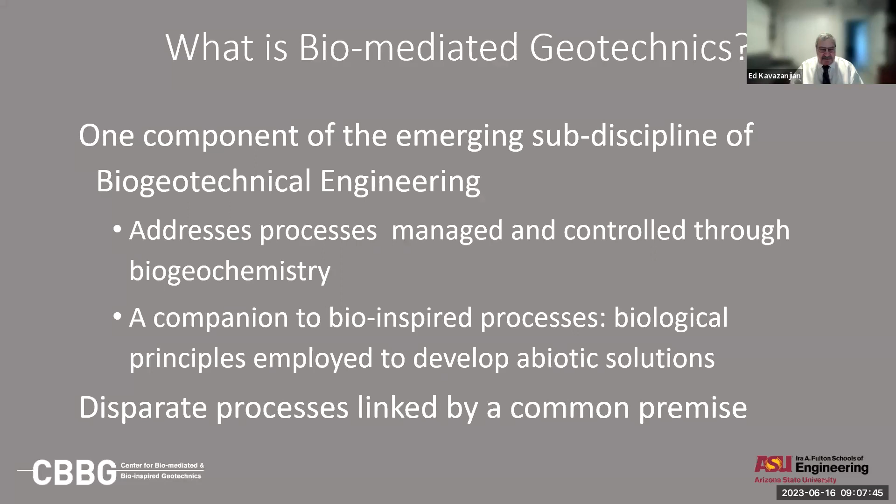Biomediated geotechnics addresses processes managed and controlled through biogeochemistry. It's a companion to bio-inspired processes, the second half of biogeotechnical engineering, in which biological principles and materials are employed to develop abiotic solutions. These are somewhat different or disparate processes, but they're linked by a common premise.

That premise, that biogeotechnical premise, is that through 3.8 billion years of trial and error, call it evolution if you want, or trial and error, or intelligent design, nature has developed many elegant and effective biogeotechnical processes. So we can learn from nature how to use these processes to address a variety of geotechnical problems.

For instance, this is a building in San Francisco called the Cliff House. I think it's obvious why it's called the Cliff House. Those cliffs are carbonate cemented sands, bio-cemented sands that naturally formed. From an engineering perspective, are very resistant to erosion. From a geological perspective, maybe not so. But from an engineering perspective, they're durable materials that are very resistant to wind and water erosion.

And this is a picture of an ant tunnel. Some of you may have had an ant farm like this when you were children. The ants tunnel 2 orders of magnitude more efficiently than people in terms of the amount of energy they use to move the earth. Now, we'll probably never get to that level of efficiency, but what can we learn from ants and how they tunnel to make our tunneling processes more efficient and safer?

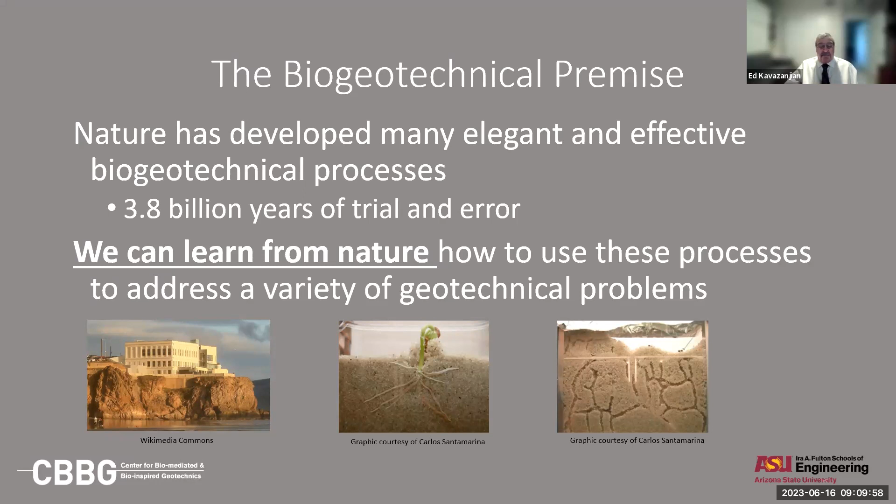Back to biomediated processes, which is the topic of my lecture today. So mediate, that's a verb in the English language, to bring about a result such as a physiological effect. A biomediated geotechnical process is a biogeochemical reaction that changes the geotechnical behavior of the soil or rock beneficially in a way in which it can aid us in our engineering. And it may involve a living organism like a microbe or a fungi, or a biological material like an enzyme.

Sometimes we broadly interpret this process to include abiotic natural processes, interpreting the word bio as in the biosphere. So any process that's in the biosphere, even if it doesn't involve biological materials or a living organism, we might interpret as a biomediated process. And we can argue about that forever. I think it's up to the individual as to how they want to interpret that.

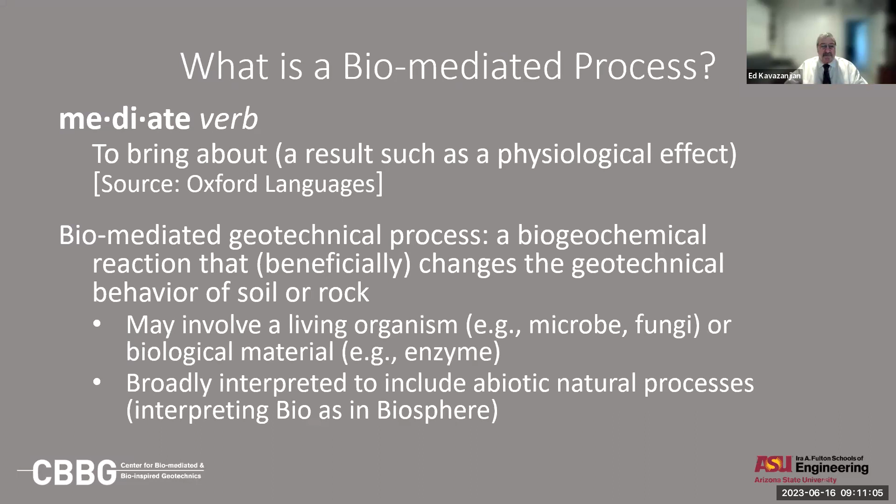This is a little diagram prepared by my colleague Jason DeJong that illustrates why we are interested in biomediated processes from a geotechnical perspective for improving the properties of soil. So we have a chemical reaction that may induce inorganic precipitation, which we call biomineralization. It could induce organic precipitation, biofilms, gas generation, biogas, and all of these processes can have beneficial engineering effects. And all of these processes can be controlled.

They can be mediated by biological reactions, by providing nutrients, by stimulating microbes. We can mobilize these chemical reactions to influence the mechanical properties of the soil, to influence the permeability by 3 orders of magnitude, to influence the stiffness by 2 orders of magnitude, compressibility by 2 orders of magnitude, shear strength by 2 orders of magnitude. We can control the volumetric response to some extent. We can do these pretty well in the laboratory right now for a variety of processes.

The challenge in front of us now is upscaling these processes from the lab into the field. And in the field, when we apply these processes, we have to deal with issues like spatial uniformity of the ground and the permanence of our processes. We're really just starting to address those issues from a biogeotechnical perspective.

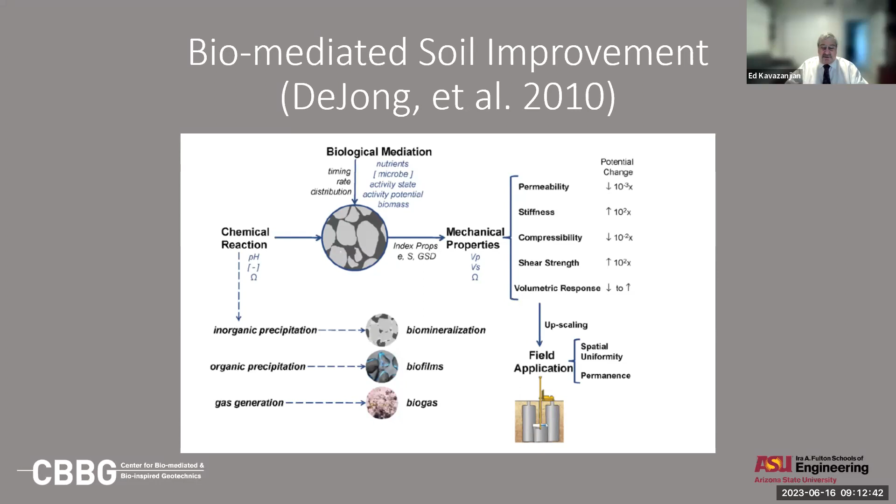Beneficial biomediated geotechnical processes include mineral precipitation. By precipitating minerals, we can cement soils together and increase their strength and stiffness. We can sequester contaminants in the soil. We can densify the soil and make it more dilatant. We can reduce the permeability of the soil.

Biogas generation - we can take advantage of that to reduce the permeability of the soil, or the hydraulic conductivity, because the unsaturated hydraulic conductivity is much lower than the saturated hydraulic conductivity.

We can change the undrained behavior. And I put undrained in quotes because typically when we think of undrained behavior, we think of a saturated material which doesn't change in volume. But when we desaturate the soil with biogas generation, even though the soil is undrained, it may still involve volume change. We can take advantage of that in some situations, for instance, in mitigating earthquake-induced soil liquefaction.

We can also use organic precipitation to generate biofilms, and use that to reduce the permeability. An interesting application that we've talked about in my center, but haven't fully addressed, is corrosion protection. Dentists are using biofilms to prevent cavities in teeth - can we use biofilms to prevent corrosion of steel elements buried in the soil, like piles and pipelines?

And then we have chemical transformation of chemical species. This is a process that's widely used now for soil and groundwater remediation. I'll talk a little bit about that at the end of the lecture.

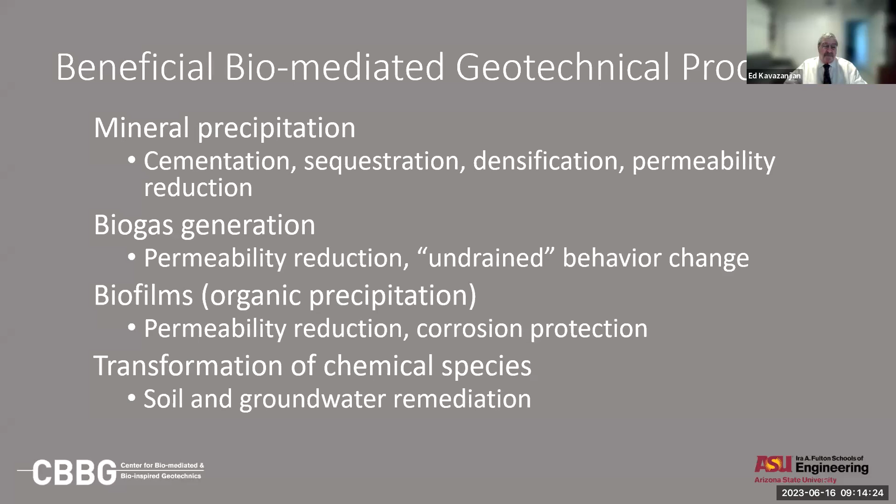So what I'll talk about today will be mineral precipitation. It's the most investigated biomediated process, and carbonate precipitation is the most studied mineral precipitation process from a geotechnical perspective. We have MICP, microbially induced carbonate precipitation, which is the most common process people are looking at.

EICP, enzyme-induced carbonate precipitation, is also popular - it's coming on fast. Then there's a third process we call MIDP, microbially induced desaturation and precipitation, which is also under investigation primarily for desaturation, but also has some benefits in terms of precipitation. There are many other mineral precipitation processes involving iron, phosphorus, salt, and other minerals, but carbonate precipitation is still the one that has generated the most interest among geotechnical engineers.

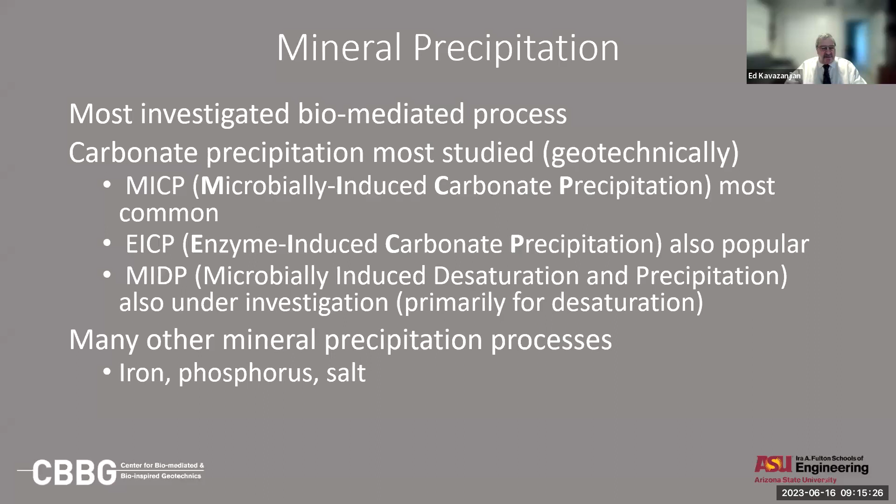So, calcium carbonate precipitation - I call it biogeoalchemy. I call it turning sand into sandstone via precipitation of calcite, or calcium carbonate, as bioalchemy. The medieval alchemists wanted to turn lead into gold. We're not turning lead into gold, we're turning sand into sandstone. But if we can do that efficiently and cost effectively, we can make just as much money as turning lead into gold. Hence the term biogeoalchemy.

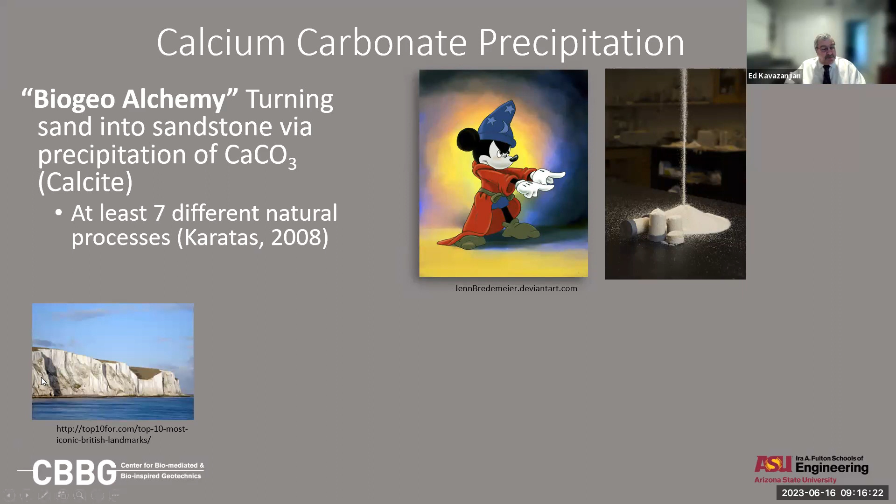One of the first students I had working on this process, Ismail Karatas, identified seven different natural processes by which calcium carbonate is precipitated in nature. One of them, for instance, is the White Cliffs of Dover. This isn't carbonate sand - this is pure carbonate that was precipitated by a biological process.

Again, these cliffs are very erosion resistant from an engineering perspective, with a 75 to 100-year lifespan perhaps. Maybe not in geologic time - they will erode - but from an engineering perspective, this carbonate precipitation has created a very durable material. If we could learn how to do that where we needed this kind of material, that would be a great contribution to geotechnical engineering.

But I first got interested in biogeotechnical engineering when I was exposed to this, and I thought, well, in a landfill that's not a good thing. But what if we could get this to happen in a situation in which it's beneficial - for instance, under a building, or in an area where we wanted to tunnel through cohesionless sand and gravel?

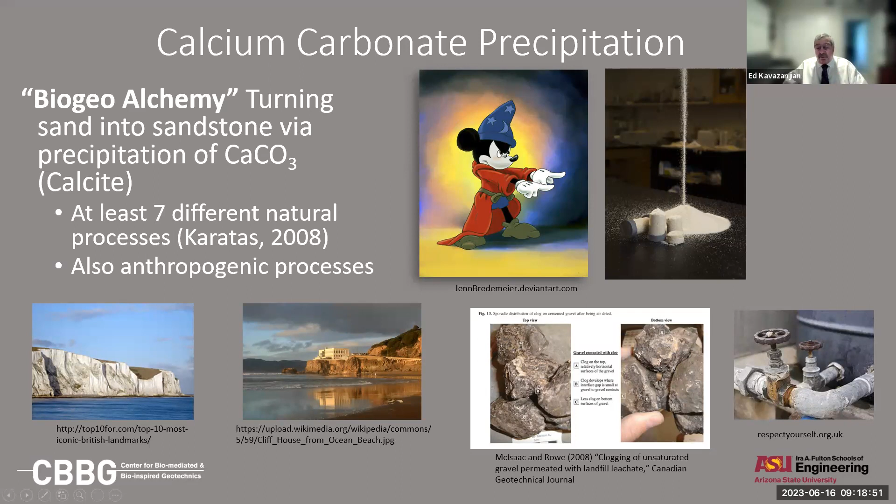Here's another anthropogenic or human-induced mechanism. We often see white scale on pipes around the joints where they leak a little bit, and we see these scales on the inside of pipes. These are typically calcium carbonate scales that develop in a relatively short period of time, a time frame that would be suitable for engineering purposes.

So if we can control calcium carbonate precipitation in sands and cohesionless soils, there are just so many applications. We can support foundations without piles, with smaller footings.

We can control fugitive dust. We first looked at fugitive dust as kind of a side application at construction sites. Frankly, of all the applications that we've been looking at in our center, this is the one that has the most interest from outside parties, and I'll talk quite a bit about it later.

Mitigating earthquake-induced liquefaction is something that's very dear to my heart, having lived in California for 20 years. We could stabilize underground openings in what our tunneling colleagues call running or flowing sands. We could stabilize subgrades for roadways, stabilize slopes. We could provide surface water erosion control, scour protection around bridge piers. We could create building materials, biobricks, by biocementing sand and gravel. And there are many more applications. I think you just have to use your imagination.

So let's talk about the three predominant processes that people have looked at for carbonate precipitation, starting with MICP, microbially induced carbonate precipitation. It's based on the hydrolysis of urea, or ureolysis. In MICP, the enzyme urease breaks urea down into carbonate ions and ammonium ions, creating carbonate ions in an aqueous solution. If calcium ion is present, it can combine with the carbonate to form calcium carbonate, which under the right environmental conditions will precipitate.

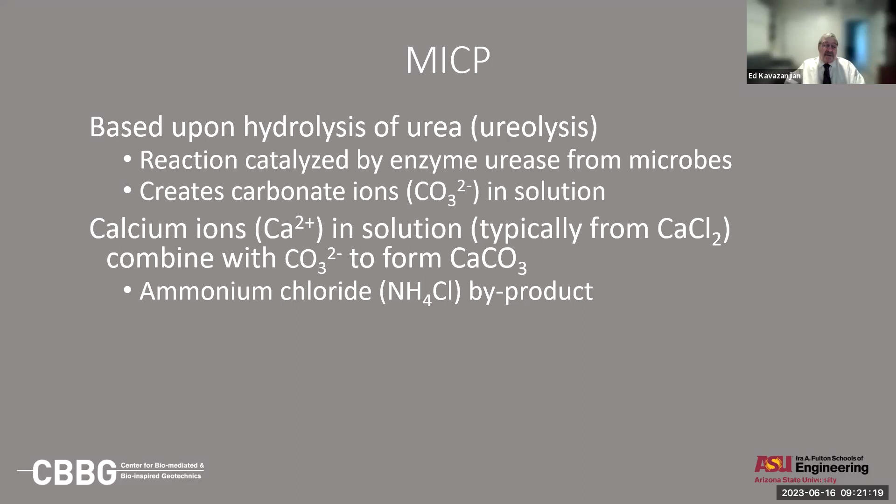We can't forget about the other half of the ureolysis reaction, because not only does it create carbonate ions, but it creates ammonium ions, NH4. And if we're using calcium chloride as the source of our calcium, then we have chloride left over. The chloride will combine with the ammonium and produce a byproduct, ammonium chloride, a salt that's sometimes regulated as a groundwater contaminant. So it's something we have to pay attention to when we're using MICP. I'll talk a little bit more about that in a bit.

But MICP is by far the most popular biomediated process for geotechnical engineers. A quick Google Scholar search identified 716 new citations in January, February, and March of this year. Sometimes I think I get asked to review all of those for journals, given the number of requests that I get. And since 2022, there have been 2,970 citations in Google Scholar on MICP for geotechnical purposes. It's a pretty impressive number.

So MICP via ureolysis, we rely on the microbes, the M in MICP, to provide the enzyme urease. Ureolytic microbes can be introduced into the process in two different ways. We can use what we call bioaugmentation, where we grow the microbes outside of the ground and then inject them into the ground along with the urea and the calcium chloride, or we can stimulate the ureolytic microbes already in the ground. There's a theory in microbiology behind this.

I became a geotechnical engineer because I didn't want to take chemistry and biology, and I've been forced to learn more microbiology in the last 10 years than I ever thought I would know. But there's a philosophy in microbiology that every place you go, you have all the microbes you need for whatever microbial process you want to control. All you have to do is stimulate those microbes.

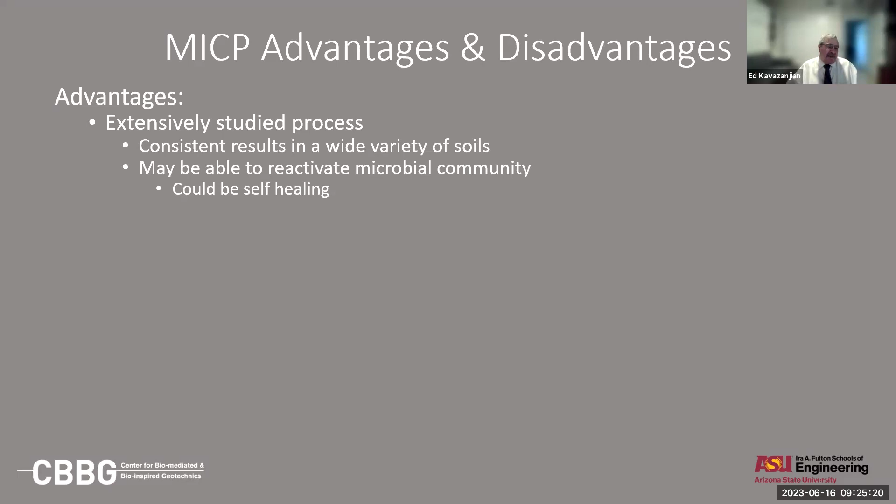What are the advantages and disadvantages of MICP? Well, one of the advantages is it's an extensively studied process. We can get consistent results in a wide variety of soils. And one of the things about MICP is once the microbes are there, we can probably reactivate them. They may go dormant, but if you need to reactivate the process, for instance if an earthquake comes and breaks some of the bonds that you're relying on to mitigate liquefaction, hopefully by giving them a little bit more nutrients we can reactivate that microbial community and create something of a self-healing process. That's yet to be proven, but that's kind of a goal.

What are the disadvantages? Well, one of the disadvantages of MICP is multiple cycles of treatment are required for significant strength gain. Sometimes some of the papers I see that get megapascals in unconfined compressive strength are treating the soil 10, 12, 14, 20 times. Frankly, I don't know any ground improvement contractor who's going to want to use a process where he has to apply the treatment 20 times.

Other disadvantages of MICP: the embodied energy may be similar to Portland cement. It's been promoted in some places as a sustainable replacement for Portland cement, but urea comes from natural gas, and the embodied energy in the urea that we use in MICP is at the same level as the embodied energy in the Portland cement that we use for regular cementation. I'll talk about this again at the end when I talk about life cycle analysis.

I mentioned the ammonium chloride byproduct that can be problematic, particularly for the multiple cycles of treatment, because you're going to be producing more ammonium with each treatment. Some applications require fewer treatments and mitigate this issue.

Dust control, we don't need 8, 10, 12% carbonate, we just need maybe 1%. Liquefaction mitigation, it seems like we don't need as much carbonate as we do to get a high unconfined compression strength.

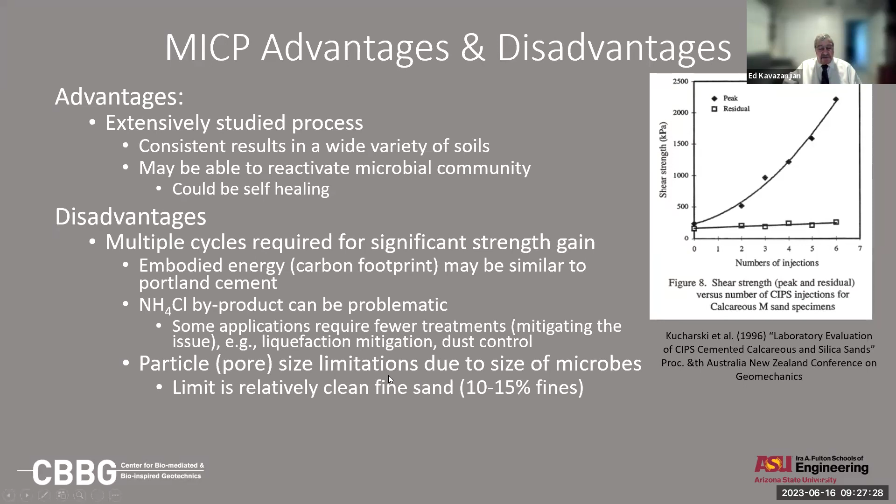There are also particle pore size limitations due to the size of the microbes. The microbes are actually kind of chunky, they have trouble fitting through the pore throats. So if you're generating the microbes outside of the soil and expecting them to penetrate into the soil, you can be limited to relatively clean, fine sands or coarser materials, but not finer materials. And if you have too many fines in the sand, over 10 to 15%, you might find some limitations based on pore size.

What is the experience with MICP? Well, there's more and more all the time. Two of the seminal experiences.

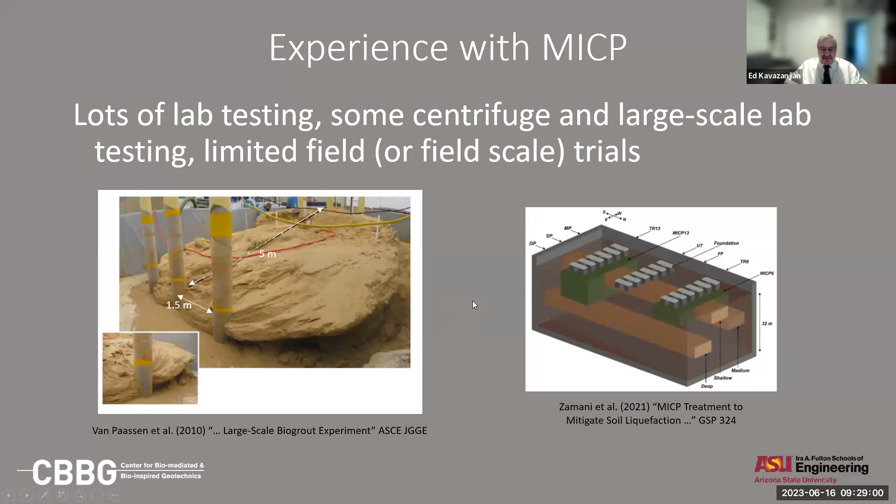More recently, UC Davis, the group led by Professor DeJong, has been doing centrifuge experiments. Here's a centrifuge experiment by some of Dr. DeJong's students and postdocs, where they've used MICP treatment to mitigate soil liquefaction. They've biocemented these blocks of soil, put little model foundations on top of them, spun it up to 50 or 60 Gs, and then shaken it with simulated earthquake shaking, and shown that the treatment is successful at mitigating the effects of liquefaction.

The second process is EICP, and it's really the same chemical process as MICP. It uses ureolysis, hydrolysis of urea catalyzed by the enzyme urease. The difference is that EICP uses free urease. It doesn't rely on microbial urease, although some people who do EICP cultivate ureolytic microbes in the lab and then extract the urease from them.

In our lab, we extract it from plants, from a bean called the jack bean, a relative of the soybean that's particularly rich in urease. So we have the free urease. We found, somewhat accidentally, that adding powdered milk with the urease, originally proposed as a stabilizer for the enzyme, has had the unanticipated effect of providing very high strength at low carbonate content.

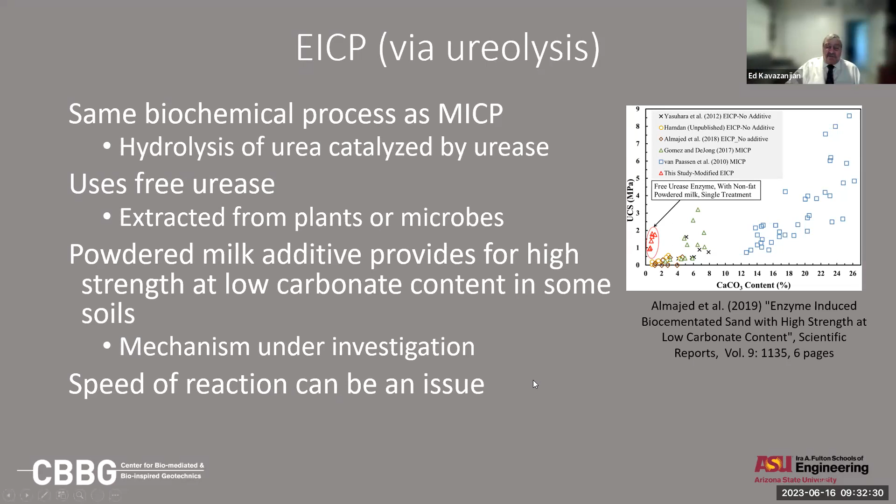So what are the advantages and disadvantages of EICP? Well, the advantages: we use less substrate because we get higher strengths at lower carbonate contents, or the same strength at lower carbonate contents. That means lower cost, and maybe one and done. Maybe we can learn how to get that high strength in one cycle, and we don't have to treat the soil 10 times. When we use less substrate, we produce less ammonium chloride, so that's a little bit easier to manage.

All of the carbon in the system goes to carbonate formation. In MICP, some of the carbon has to go to feeding the microbes. In EICP, all the carbon goes to forming carbonate. And then the enzyme is smaller than the microbes, so it can penetrate finer grained soils. It can penetrate into coarse silts.

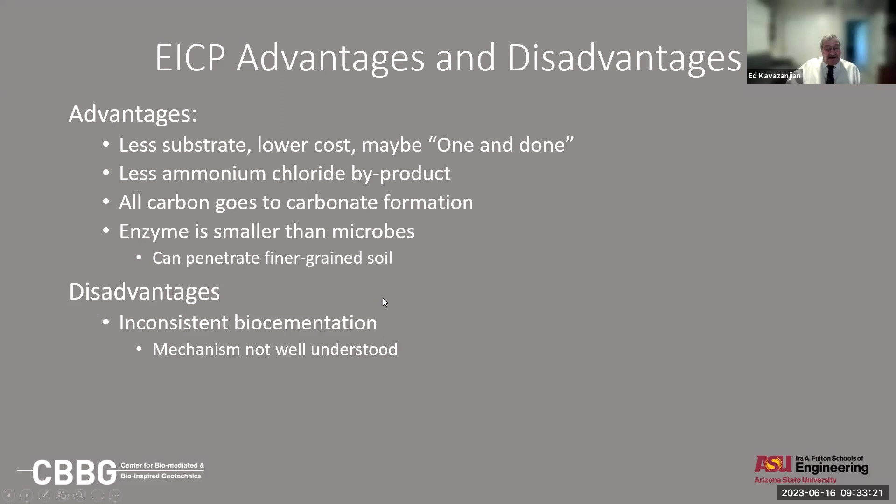Disadvantage: we find this inconsistent biocementation. I'll show you an example of that in a minute. The mechanism is not well understood, so we need to understand that mechanism better.

So here's some Ottawa sand. This is Ottawa 2030 sand. It's the sand that passes the number 20 sieve and is retained on the number 30 sieve. In the US, it's a standard testing sand, found everywhere in the middle of the United States. It's a glacial outwash sand, 99.8% silicon dioxide, quartz. And you can buy it from a bunch of different quarries.

So we were buying it from one vendor, and this was the soil we treated with one cycle of treatment, and we got 1.8 megapascal in strength. We were running out of this sand, and we bought it from another quarry.

It was a little cheaper, so we called this the second quarry we bought it from. Pretty much the same stuff, 99.8% silica quartz, 2030 sand. But when we treated it, we got half the strength - 0.7 megapascal. We found that pretty curious.

So we bought Ottawa 2030 sand from a third quarry, which we call the B3 sand. When we treated it, we got 0.2 megapascal. I didn't trust these results, so we ran tests on all three sands 3 or 4 times to confirm. I still don't understand why we get 10 times higher strength with this Ottawa 2030 sand than with this Ottawa 2030 sand.

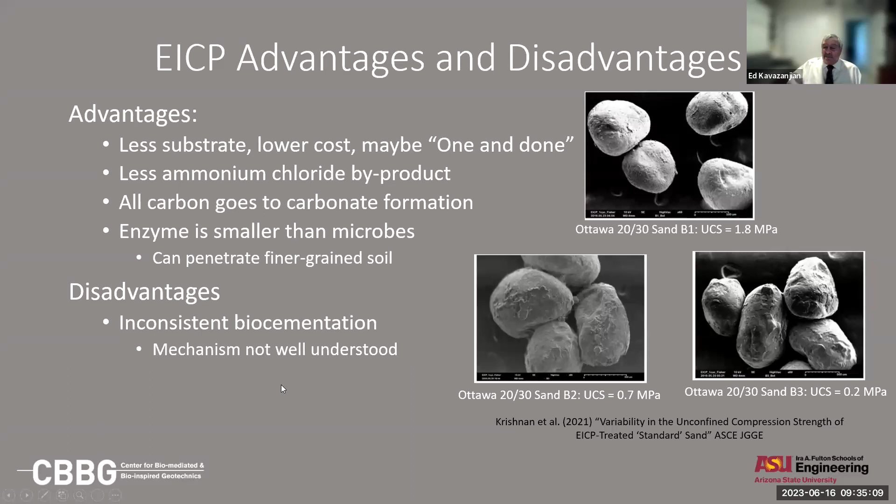So if we can understand what makes this sand so strong, we could learn how to treat other sands so they perform the same way. Then we'd really have a process we could use for foundation improvement, making building materials, and a variety of important applications.

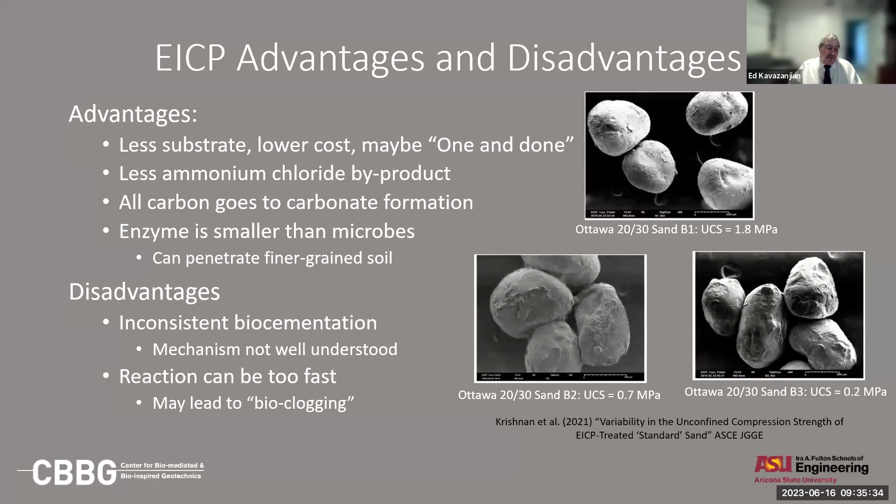The reaction can be too fast, not only clogging the nozzles and tanks, but clogging the soil around the injection points. If it precipitates too fast around the injection point, the permeability will drop, it'll get harder and harder, and eventually become impossible to introduce more substrate into the soil.

What's our experience with EICP? Not as much lab data as MICP, but it's starting to accumulate. Several investigators are studying ways to control the reaction. You can reduce the pH of the solution, reduce the temperature, or chill the EICP solution.

There are some studies using fine-grained soils, silts and clays. Some purport to show improvement, but I find the results inconclusive or unconvincing. One problem is the EICP solution has salt in it, calcium chloride. When you introduce calcium chloride into a saturated clay, you're going to suppress the double layer and change the strength anyway. So for studies claiming to improve clay properties through EICP treatment, it's not clear to me whether they're really improving the soil by precipitating carbonate or by suppressing the double layer with the salts introduced. I need to be convinced of that.

But moving on, we've done quite a bit of wind tunnel testing on fugitive dust control, and now we're in field trials. We have large-scale field trials - one completed and 3 pending within the next 6 months. We're fortunate at Arizona State to have a wind tunnel that was developed for NASA to study windstorms on Mars, and we were able to use that.

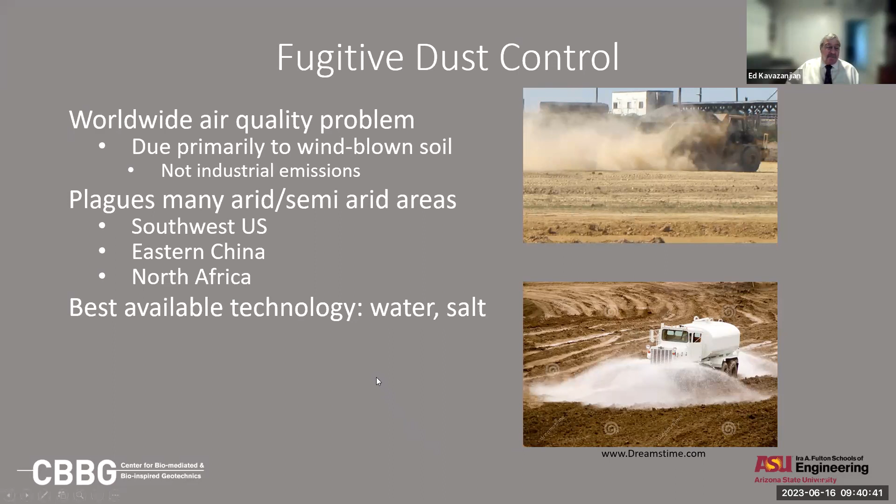Again, looking at Google Scholar - not quite as robust as for MICP, but for EICP there were 70 citations in 2021, and 14 in the first three months of 2022. For MICP for dust control, there were 106 citations in 2021 and into 2022.

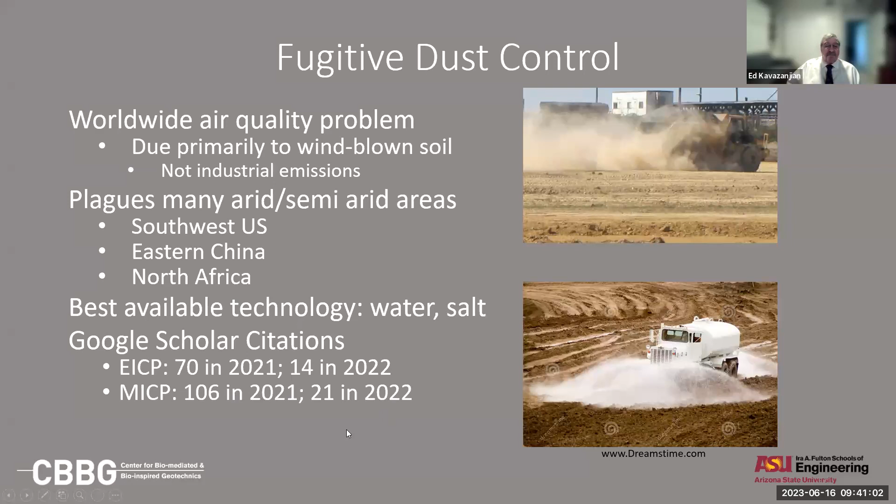So, biogeotechnical fugitive dust control using either EICP or MICP - in our test plots we've done both. The concept is to create a wind erosion resistant carbonate crust by spraying on an EICP solution.

The advantage compared to applying water is it's one and done - you don't have to continuously return to the site to keep the soil wet. The question is, one and done for how long? Will it last a week? A month? A year? That really affects the economics of the process.

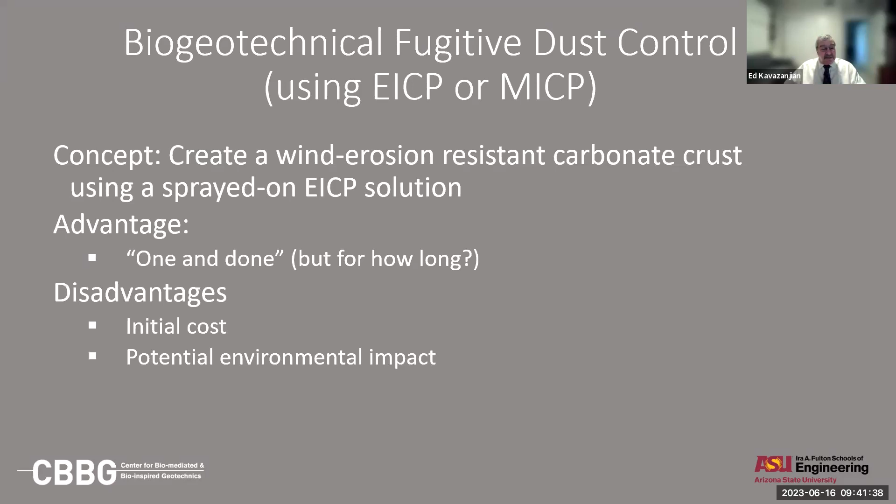The disadvantages of this process are a higher initial cost than water - you've got to buy the chemicals. If you're doing MICP, you use bio-augmentation, so you have to grow the microbial culture; for EICP, you have to get the enzyme. In both cases you need urea and calcium chloride. There's also potential environmental impact from the ammonium, and from the life cycle assessment of the urea.

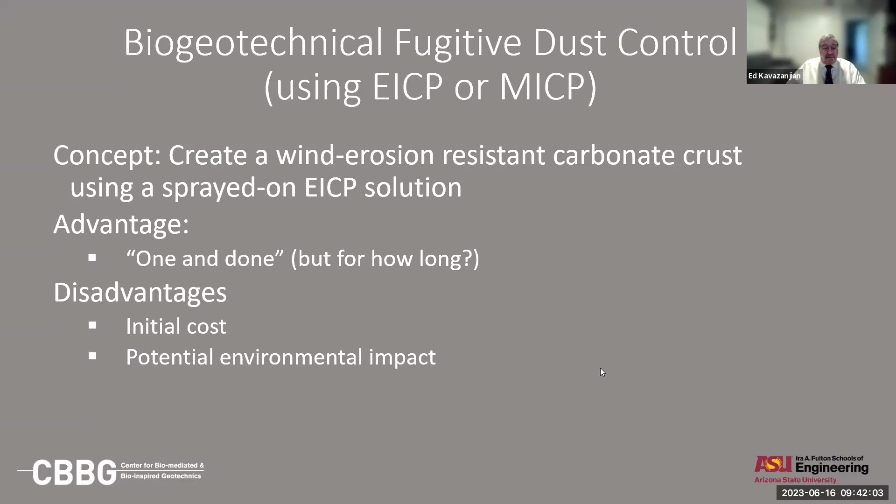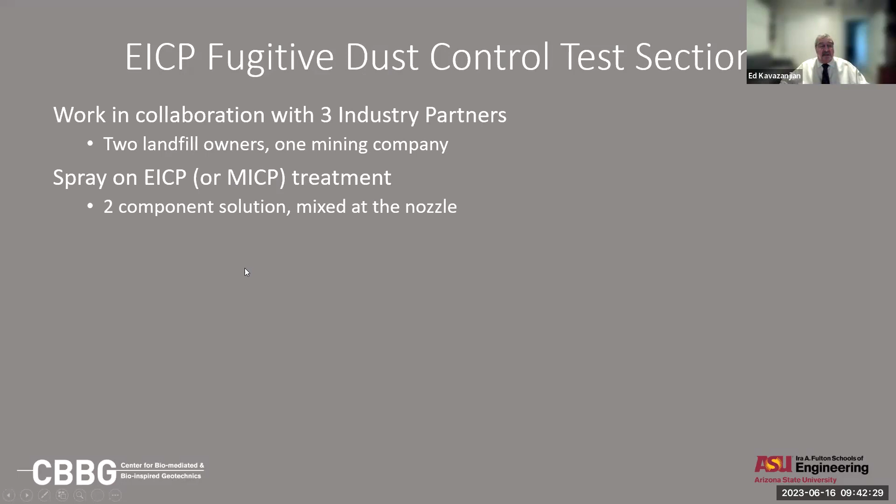As I mentioned, we've moved from wind tunnel testing into the field. The one test section we've completed was work done in collaboration with 3 industry partners - 2 landfill owners and a mining company. We sprayed on both EICP and MICP as a 2-component solution, using 2 tanks with our solutions mixed at the nozzle.

We did an initial trial at an Arizona landfill in 2021, where we developed our deployment and monitoring techniques. Here are my students spraying the EICP.

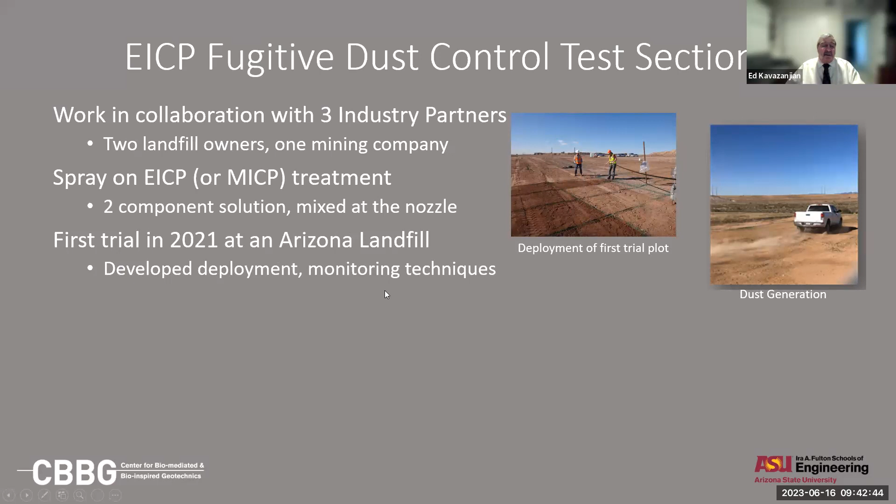Then we did a second trial where we deployed 5 test strips: 1 for MICP, 1 for magnesium chloride salt - the mining industry standard, 1 for EICP, 1 untreated, and 1 where we mixed the EICP with a little bit of xanthan gum, supplementing the enzyme with some biopolymer. We are in the process of comparing the results.

One thing we learned from the first trial is we couldn't wait long enough for a windstorm to generate dust. In fact, before we had a significant windstorm, we had heavy rains, which washed away a lot of our crust. So in our second trial, rather than waiting for wind, we created our own dust storm - we dragged a chain link fence behind a pickup truck and drove back and forth on our test strips to generate fugitive dust and get measurements to compare these treatment techniques. That field trial is now completed.

The PhD student writing that up will be defending her thesis next month, and we'll see how EICP compares to MICP and magnesium chloride. We have 3 more field tests in planning, looking at a fallow agricultural field in Arizona, which is assumed to be a major source of fugitive dust.

We have another mine tailing site we're going to treat for the Arizona Department of Environmental Quality. And then there's the Salton Sea.

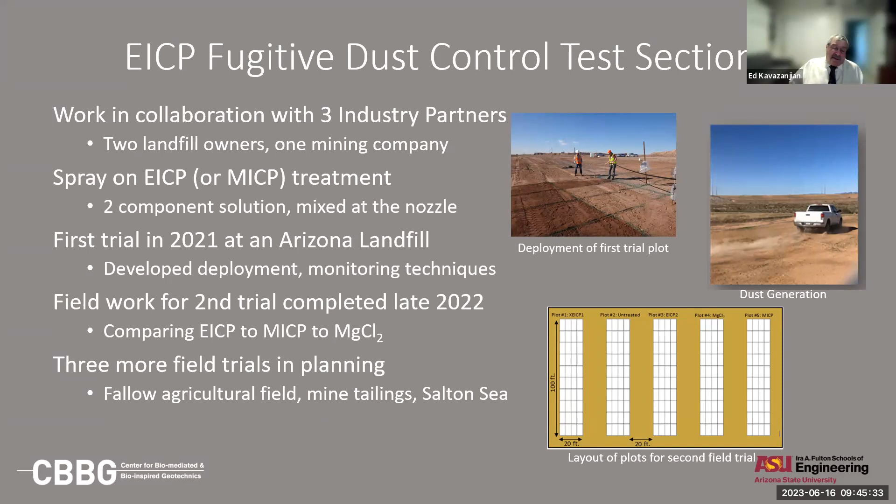And there are several other sites that have contacted us. The Highway Department in the Northeast US says that after the spring thaw, they have fugitive dust problems. An iron ore mine in Minnesota said the same thing. When the ground thaws and dries out, they have fugitive dust. And so we're looking at the field freeze-thaw resistance of our carbonate spray to see if it has applications in those kinds of climates.

One other application to talk about on EICP, and that is making biocemented soil nails and columns. So the concept is to create columns, either vertical or angled, of biocemented sand for ground improvement.

And we take inspiration from other improvement processes. I like to show this picture over here on the left. This is from Lizzi, as quoted by Mitchell and Villet. And Lizzi, this was really soil nailing, but I show this because he called these root piles. He was one of the first with a bio-inspired design. He developed this idea of reinforcing the soil, the slope, the same way that roots reinforce the ground. So he was really the first bio-inspired engineer.

But if we look at what we use columns for in geotechnical practice, we look at using them for soil nails. We can support foundations. We can create soil mixed columns for liquefaction mitigation and ground improvement, support embankments and retaining walls. Lots of applications for biocement or for improved soil improvement via columnar reinforcement.

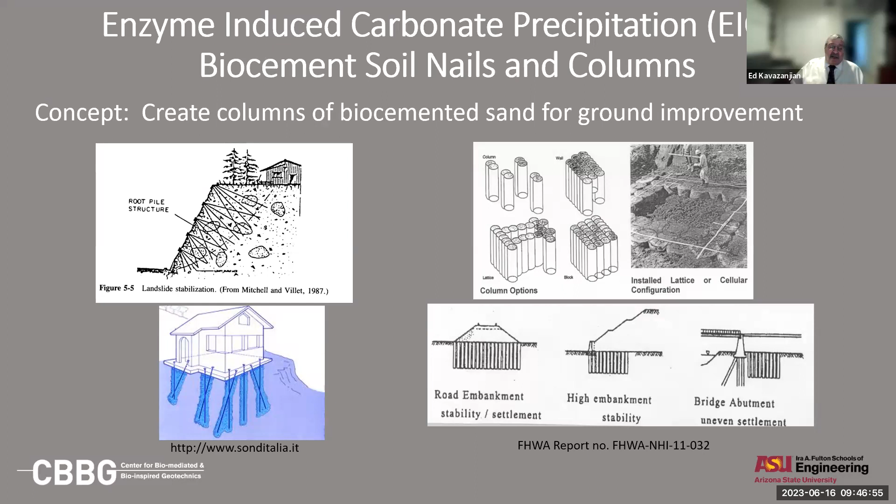We said, well, maybe we can also do that with soil nails. So we introduced 4 tubes, perforated tubes at 15 degrees through the face. We drilled holes in the faceboard, inserted these tubes, and then we injected 155 milliliters of EICP solution into each tube and let it cure.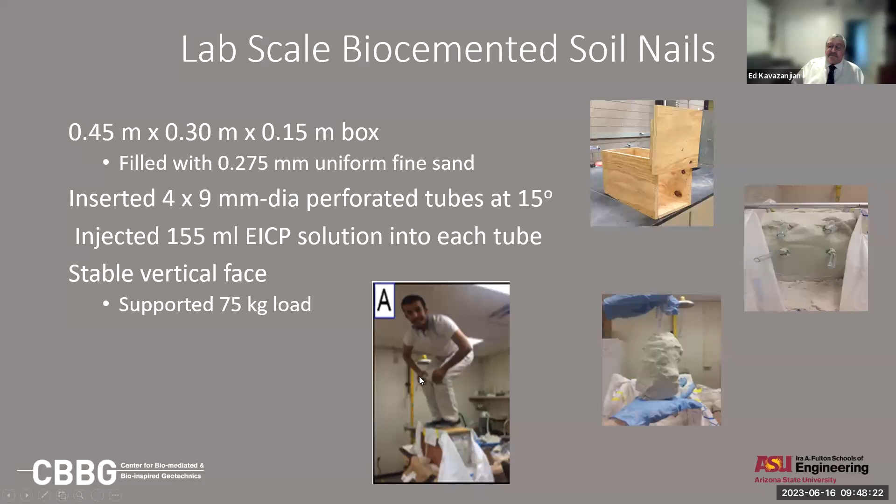After we excavated around our soil nails, this is what our biocemented column looked like. Moving on, we decided to create some field scale columns. We created some mid-scale columns in wooden boxes 1 meter high, and there's a paper in Soils and Foundations that discusses these mid-scale boxes.

But we used that as a prelude to creating these field scale columns in our test pit. So CBBG, the Center for Bio-mediated and Bio-inspired Geotechnics, has a test pit on one of the ASU campuses. We're about 6 meters by 2.4 meters in the main bay, and then we have an adjacent bay here that's 3 meters by 1.8 meters. It's 3.8 meters deep. We can fill it up with quarry sand. We have a crane, and we can put reaction beams across the pit at 3 locations.

And so we took advantage of this to create some EICP columns, enzyme-induced carbonate precipitation columns. And we did it using conventional grouting equipment, using a tube-à-manchette grouting approach, a perforated tube that we would pack off in sections and insert our cementation solution.

In a conventional tube and manchette, you drill a borehole, fill it with a weak bentonite cement, install your tube and manchette, and then inject your cementation solution from the bottom up. We short-circuited the process.

We hung our tube and manchettes from wooden grill work over the pit and filled the sand around the tube and manchettes, simply because that was easier and cheaper for us.

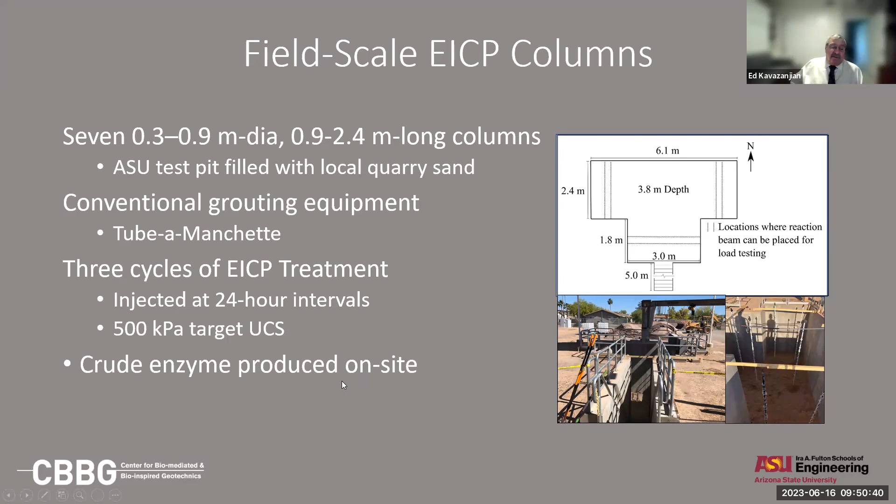We injected them at 24-hour intervals, and we used a crude urease enzyme that we produced on site. I'll talk more about that in a minute.

So this is our test pit layout. This shows 8 columns, but this one here with an X got run over by the CPT truck when we were first doing our exploration, our pre-grouting exploration.

It's kind of sad that it did, because this was the one that had a metal pipe that would have allowed us to do a pull-out test. Our other columns have a plastic pipe for the tube and manchette, and if we did a pull-out test, we would yield the pipe before we pulled the column out of the soil. So we had one metal pipe, but it got run over by the CPT truck.

I guess that's research for you. So we had these 7 columns.

They varied in diameter from 0.3 of a meter to a meter. They varied in height. The 1-meter column, just for economy, we only made it 1 meter high, starting at the bottom. If we tried to create a 1-meter column up by the surface, we were afraid we would just get fracturing. We varied the injection rate.

When we make our crude enzyme, in the beginning we would peel the husks off the jack bean, which is a very laborious process. We said, let's see what happens if we don't take the husks off. So we made some columns with the husks left on and some with the husks left off.

We instrumented 2 columns with moisture sensors. We pushed the CPT through 2 columns. We did seismic testing on 2 columns, and we did a pile load test on 1 column.

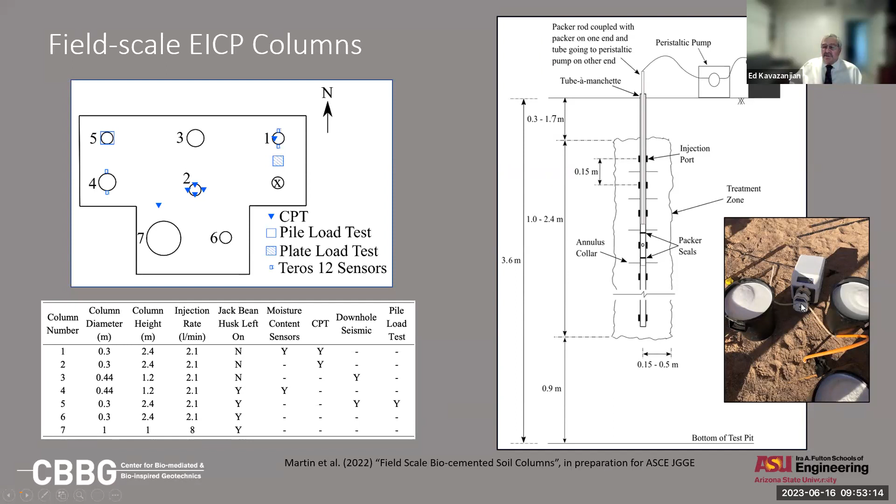This shows our pump setup, a peristaltic pump that was feeding the solution into the tube-à-manchette.

These are the results. At the right, we're excavating down, taking samples from the columns. You can see sometimes we had very good control, making a circular column of the target diameter. Our target diameters were all within about 7% of the target diameter we were shooting for.

You can see my students here excavating the pit. Much better health and safety precautions this time, although short sleeve shirts is not a good idea.

This was one of the columns after we'd almost excavated it down to the bottom. This is one of my graduate students, she's tall, she's 2 meters tall, so this was a 2.4 meter tall column.

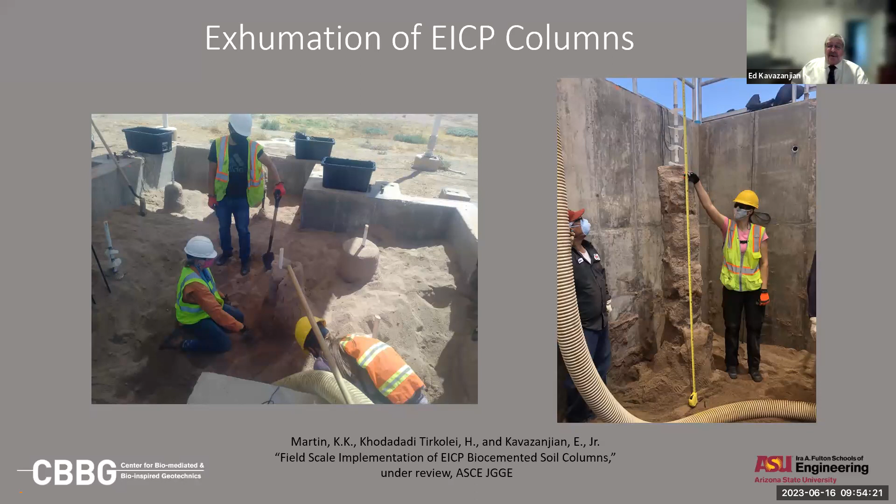After we excavated it and brushed off all the loose soil, this is what was left, and we consider that a success. The paper describing these biocemented columns is under review for publication in the ASCE Journal of Geotechnical and Geoenvironmental Engineering.

I mentioned that we made the enzyme on site. Typically, when we first started doing this, we would buy enzyme from the pharmaceutical companies, and it was very expensive. A little bottle would be $700. I kept telling my students, don't worry about the cost of the enzyme. This is lab grade, food grade enzyme. We don't need enzyme this pure, but this is our best source right now.

At one point we started making our own enzyme, the same way the pharmaceutical companies do it. The lab grade enzyme extraction process: we would dehusk the beans, soak them in a buffer solution, put them in a blender and grind them up, filter them, put them in a centrifuge, take the supernatant from the centrifuge, run it through another filter, and then purify the enzyme through two steps of acetone fractionation.

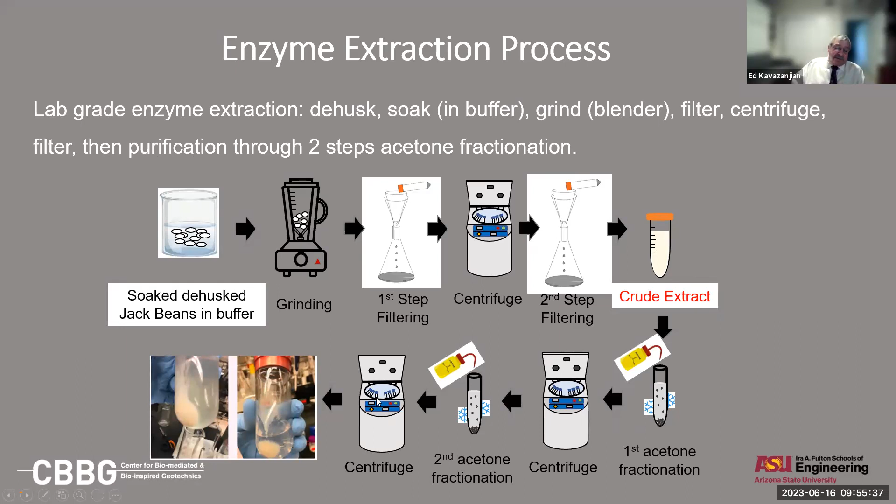The first filtration step was with cheesecloths to remove the solids, centrifuging to remove more solids, filtering it through steel wool to remove the fats. That gave us a crude extract that went through acetone fractionation, centrifugation, acetone fractionation, more centrifugation, and finally the lab grade purified enzyme.

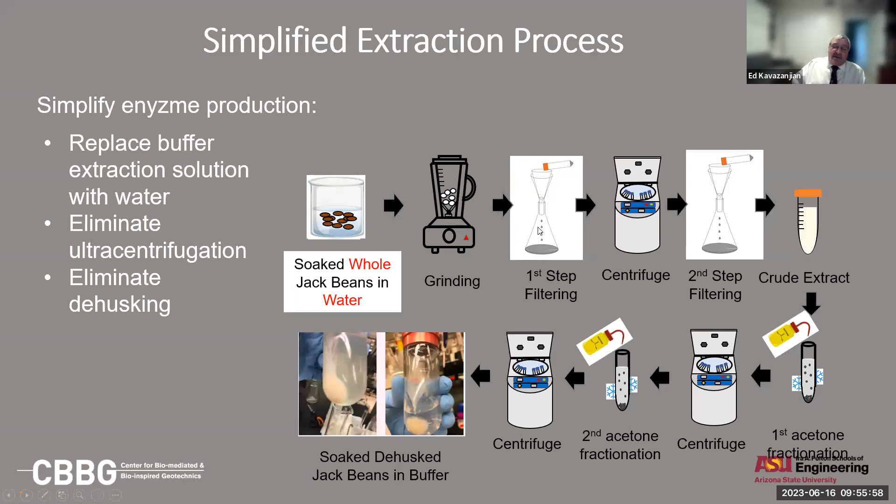We simplified the extraction process. We replaced the buffer with water, eliminated the ultracentrifugation, and eliminated dehusking. We took the whole jack beans and soaked them in water, then put them in the blender. We ran it through cheesecloth to remove the solids. We filtered it, skipping the first centrifugation, and went right to the second filtration step through steel wool to remove the fats. Then we took that crude enzyme and used it to treat the soil, skipping all of these other steps in the process.

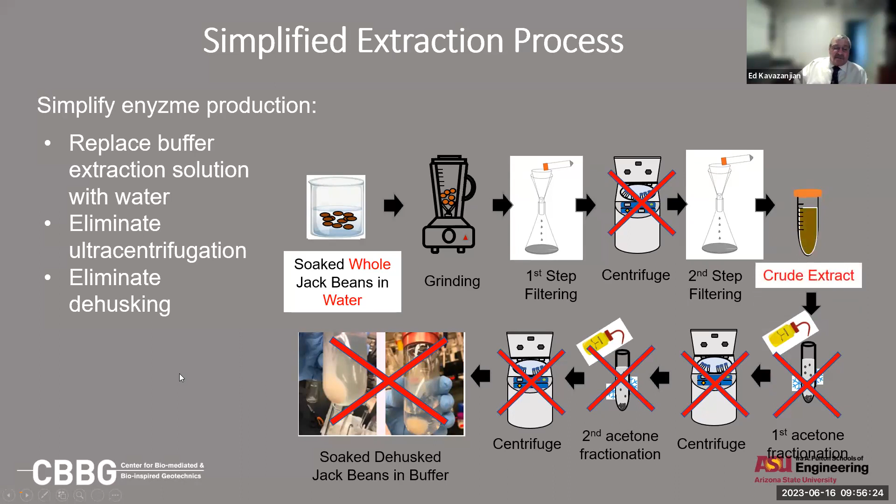What's the result? We found that not only is it cheaper, but it was more effective than the pharmaceutical grade enzyme. It provided higher strength at the same content as the refined enzyme.

My colleagues who are biogeochemists - I'm always hesitant to say this because somebody might think I understand it - but I'm told it's because of the role of the complementary proteins that are in the crude extract or in the Fisher extract.

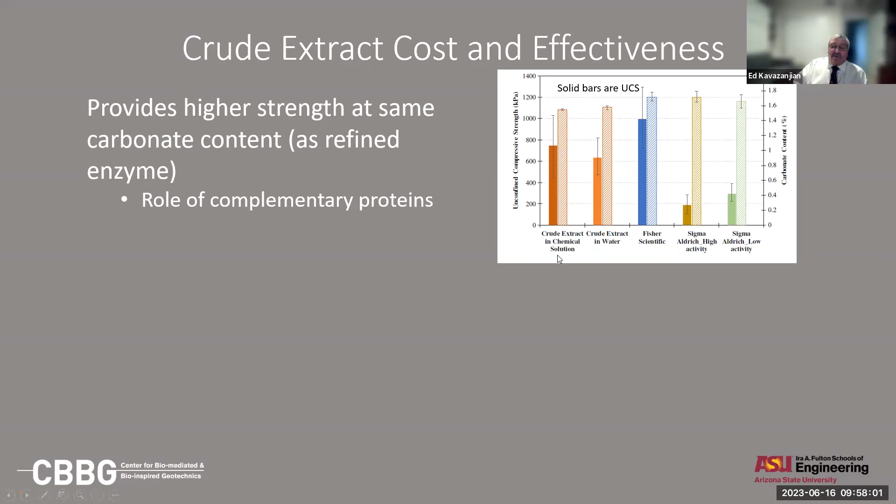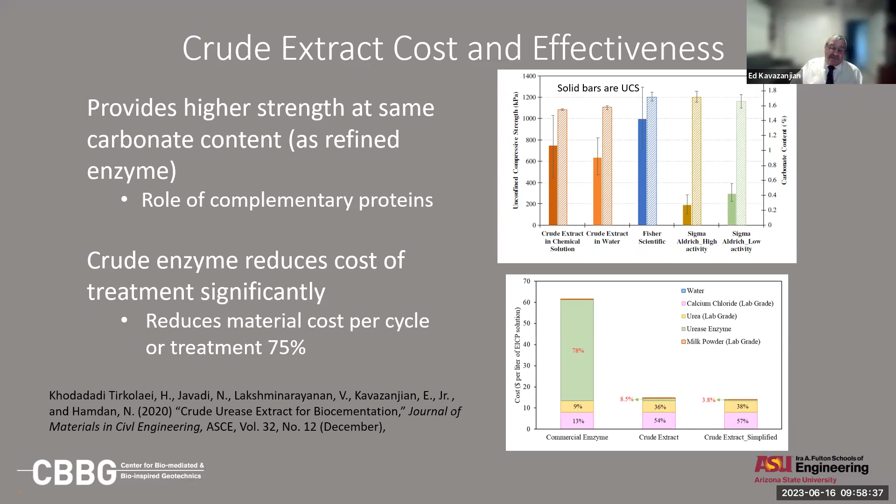When you do cost analysis, you find the use of the crude extract reduces the cost of treatment significantly - reducing the material cost per cycle of treatment by 75%. Using the commercial enzyme, it was about $60 per liter of EICP solution. The crude extract and the simplified crude extract reduced that to about $15. So that's a 75% reduction in the cost of treatment using the crude enzyme.

One more process to talk about: MIDP, or MID - microbially induced desaturation and precipitation. These days, we don't worry too much about the precipitation, we just call it microbially induced desaturation. It's an alternative carbonate precipitation process. It also desaturates the soil because while precipitating carbonate, it also generates nitrogen gas, which is relatively insoluble.

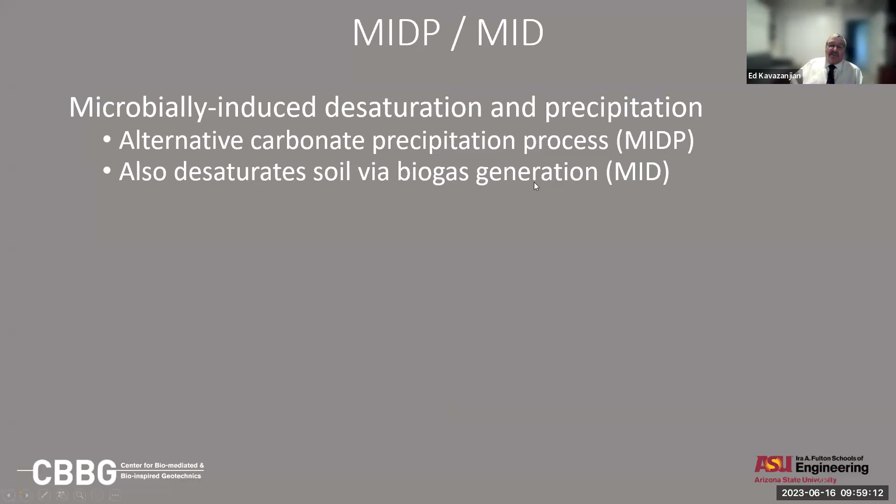The nitrogen gas forms bubbles in the pores and desaturates the soil. This process is sometimes called denitrification. You need to introduce nitrate to the soil. The nitrate is reduced to nitrite and then to nitrogen and carbon dioxide. The carbon dioxide goes into solution and provides the carbonate we need for calcium carbonate precipitation. The nitrogen, being insoluble, stays as a bubble in solution and desaturates the soil.

The good thing about this, according to my microbiologist colleagues, is that denitrifying bacteria are ubiquitous - they're everywhere, you just need to stimulate them. The carbon dioxide goes into solution, creating carbonate ions, and the relatively insoluble nitrogen gas desaturates the soil.

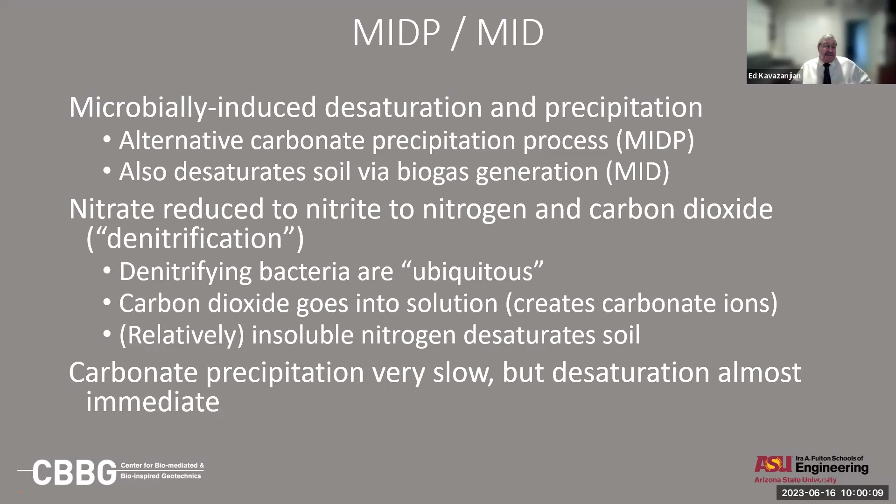The downside, if you want to precipitate carbonate, is that carbonate precipitation is very slow - it can take a year to precipitate 1% carbonate. But the desaturation is almost immediate; in a day or two, you desaturate the soil. So here's some test results.

This is back when we looked at liquefaction mitigation via microbial denitrification as a two-stage process. Stage one, desaturation. Over here on the right, these are cyclic strength curves: the cyclic stress ratio versus the number of cycles of liquefaction. The difference between 100% saturation and even just 3% saturation.

We can consistently get below 90% saturation with MID, but with even 3% desaturation, you get a 20 to 40% increase in the cyclic strength of the soil. Even 1% desaturation. That's why when we do our cyclic triaxial test, we go to such great lengths to saturate the soil with back pressure saturation to get a B value of 0.98.

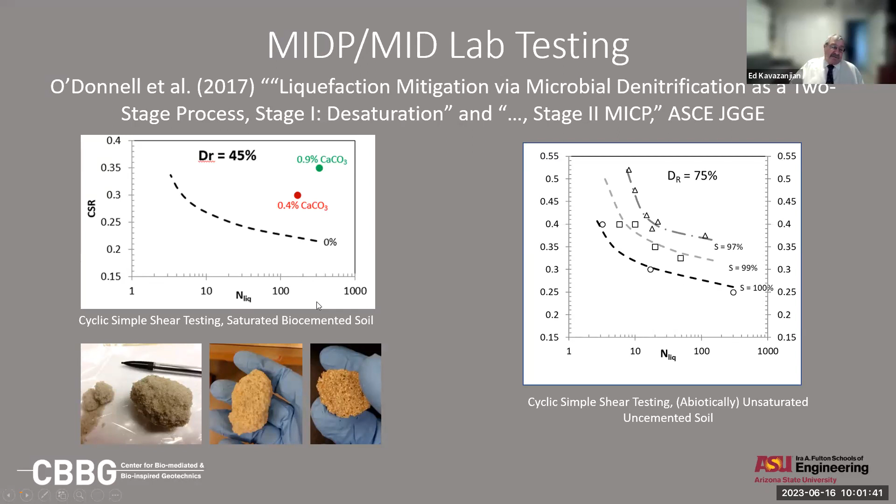It's a laborious process because even a little bit of desaturation significantly increases the strength of the soil. Over here, what we found encouragingly is that the carbonate precipitation was also very efficient, that very small amounts of carbonate significantly increased the liquefaction resistance. So with just 0.4% calcium carbonate by weight, we get like a 20% increase in cyclic strength. With 0.9 or 1% calcium carbonate, about a 40% or 50% increase in the cyclic shear strength. This scale starts at 0.15, so these distances are a little deceiving. And this is what some of the biocemented sand looks like.

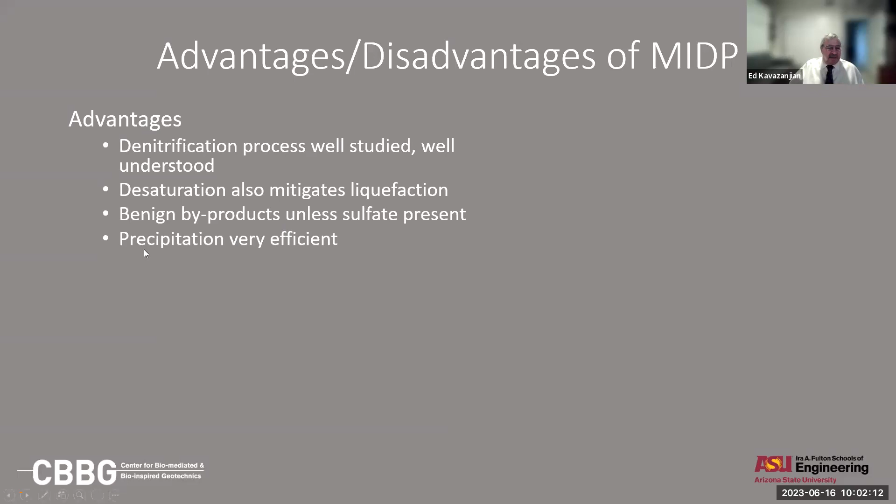What are the advantages and disadvantages of MIDP? Well, my environmental engineering colleagues tell me that the denitrification process is extensively studied and well understood. It's used in wastewater treatment plants. The desaturation mitigates liquefaction. There are benign byproducts unless sulfate is present. If you have sulfate present, you could be generating hydrogen sulfide, which is a toxic gas. But the precipitation is very efficient.

So this is one of my favorite pictures, taken by my student, Sean O'Donnell. These are two Ottawa sand particles, two Ottawa 2030 sand particles on the right and left. This circular surface, this is a scanning electron microscope image. This is the remnant of a bubble, that's why it's such a perfect circle. This is organic matter that gathered around the bubble to outline it for us. Very nice of the organic matter to do that for us.

But notice how the bubble has pushed the calcium carbonate crystals, that's what these are. You can tell by their morphology that they're calcium carbonate, calcite, into the contact zone between the soil particles. That's exactly where we want it, to increase the strength. When we do MICP, sometimes the calcium carbonate coats the soil particles and then slowly grows to create contacts between the particles. In MIDP, the bubbles push those calcite particles into the contact zone, which is exactly where we want them. So at the same carbonate content, we get higher strengths with MIDP, and at low carbonate contents, we get high strengths.

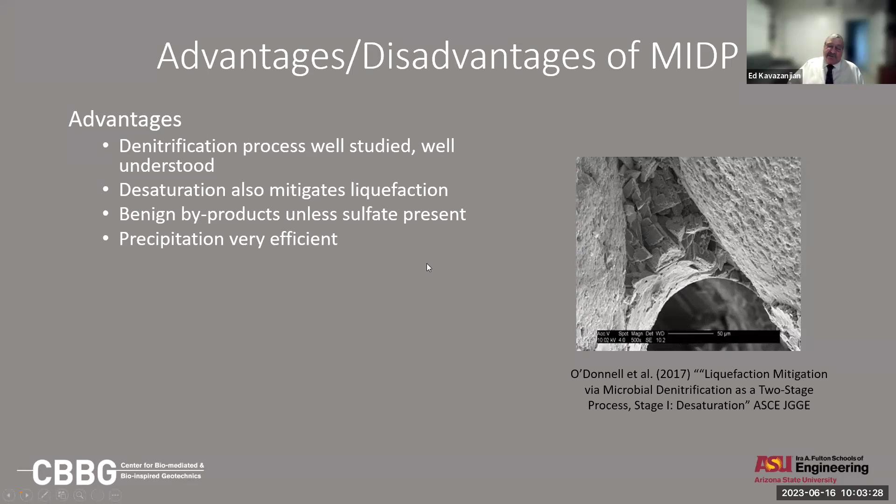Of course, the milk does the same thing with the EICP. It focuses the precipitation, not quite as efficiently as a bubble, but it seems like it's focusing the precipitation at the contacts. What are the disadvantages? Precipitation is slow, so if you're relying on precipitation, you're going to have to treat for a long time. But, you know, if you want to mitigate liquefaction and it takes 6 months to a year, and you're designing for an earthquake that happens once every 2,500 years, maybe that's acceptable.

The issue with desaturation is the longevity. How long will the soil remain desaturated? There's good evidence that in sands, it could last for decades, but I think we still need a little bit more evidence. We're doing some monitoring right now of a site where we've desaturated a low plasticity silt. But we find from tank tests in the lab that the gas, if you produce too much gas, they'll coalesce on a lens and they'll vent. Although even when it vents, the residual degree of saturation is still on the order of 90%.

There is a potential for hydrogen sulfide, H2S, if sulfate is present in the soil. And the N2 gas can lead to bioclogging. Remember, desaturation reduces the permeability. So as you create more and more bubbles, it gets harder and harder to introduce the substrate into the soil.

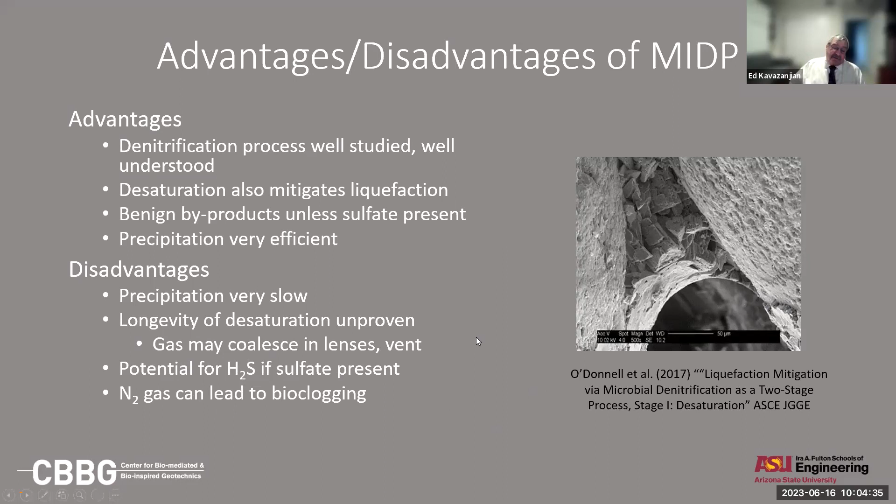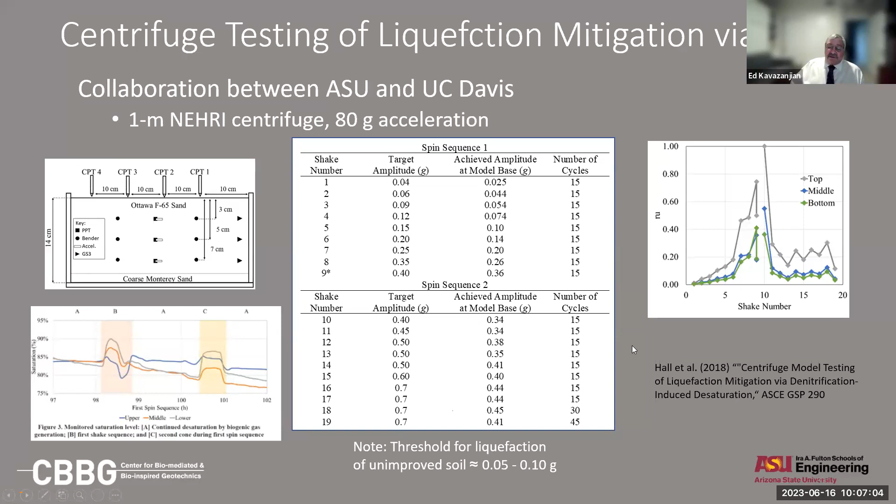Then we shut it down overnight. We went back, and the first time we shook it the next day at 0.4 G again, we did get liquefaction of the surface layer. We think that's because when we spun the model down, some of the soil vented and it loosened the soil layer, because after that, we continued to increase the acceleration and the pore pressure ratio still stayed very low. So we took this as a good indication that desaturation is an effective way to mitigate liquefaction.

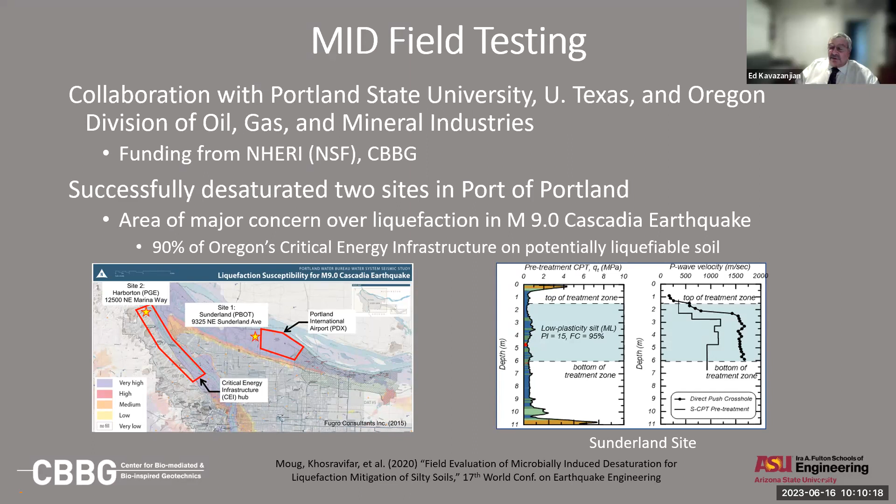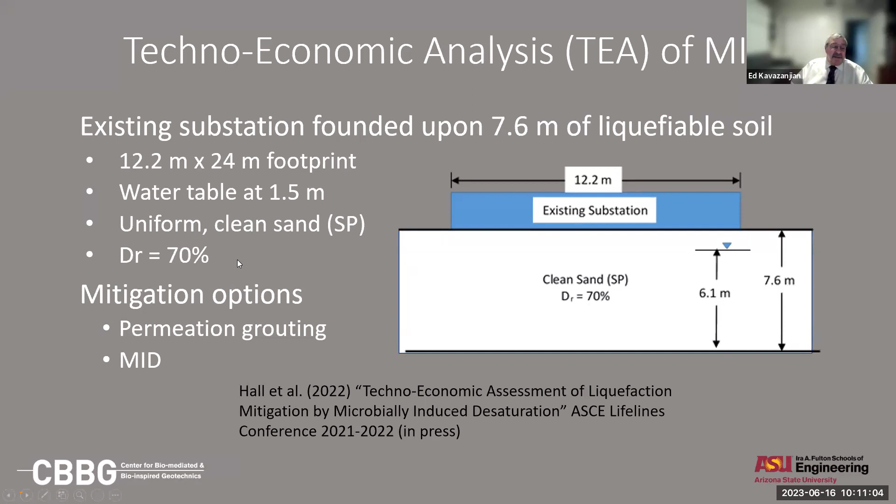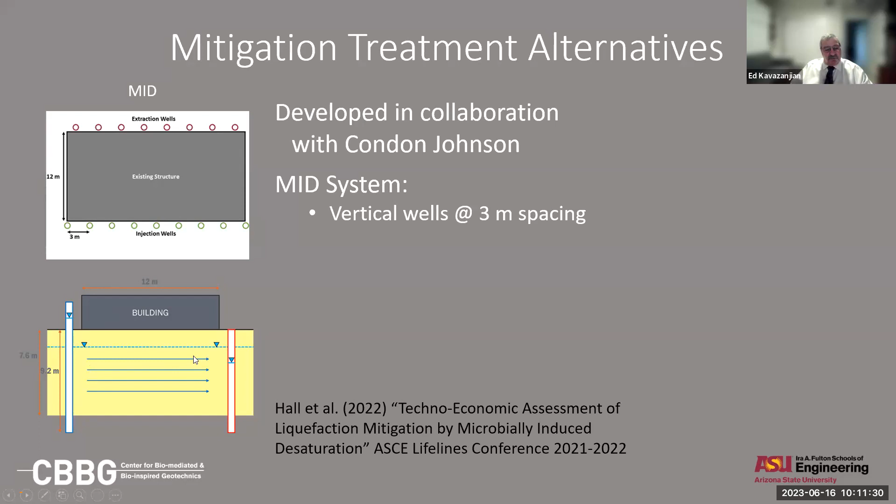We compared permeation grouting to desaturation. It was developed in collaboration with Condon Johnson, a West Coast ground improvement contractor. We designed the MID system with wells at 3-meter spacing, injection wells on one side of the building, extraction wells on the other side, 12 meters away. We would pump our substrate into the injection wells and draw it across to the extraction wells to desaturate the soil.

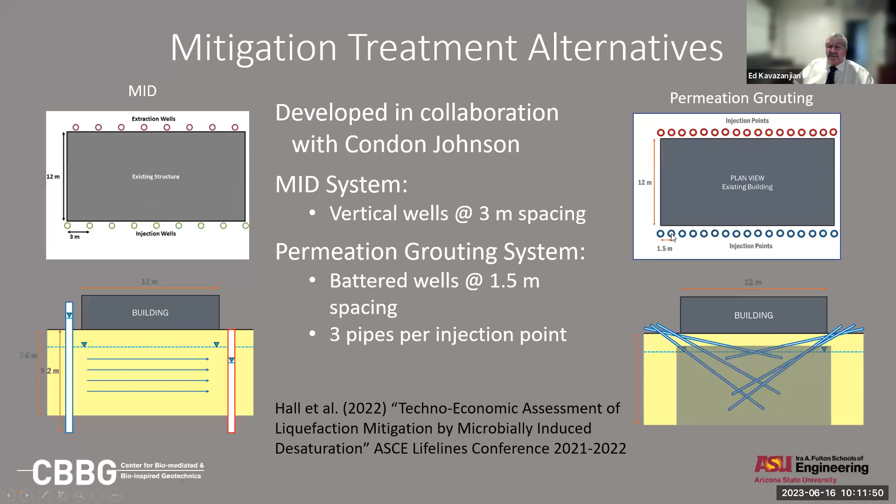The permeation grouting system designed by the grouting contractor had grouting pipes at 1.5 meters center, but at different angles. The idea was to create a grouted mass beneath the buildings that would resist liquefaction. Each injection point actually had 3 pipes at different inclinations.

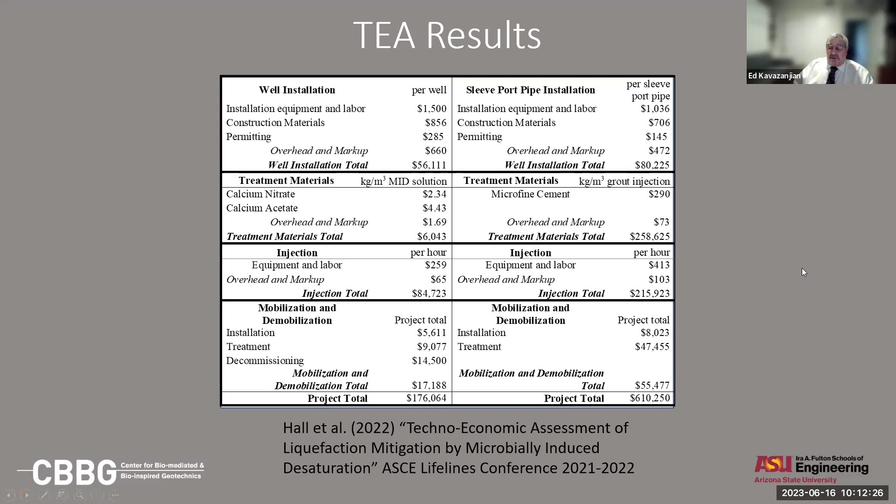So this is the cost analysis. I won't go into the details, I'll go to the bottom line. The permeation grouting solution cost $600,000, and the desaturation solution was about 30% of that, $180,000. So significantly cheaper. And we picked a situation that was amenable to permeation grouting - it was a medium clean sand. If we had a silty sand or a finer grain sand, we wouldn't have been able to use permeation grouting. We would have had to use compaction grouting, which would have increased the cost significantly.

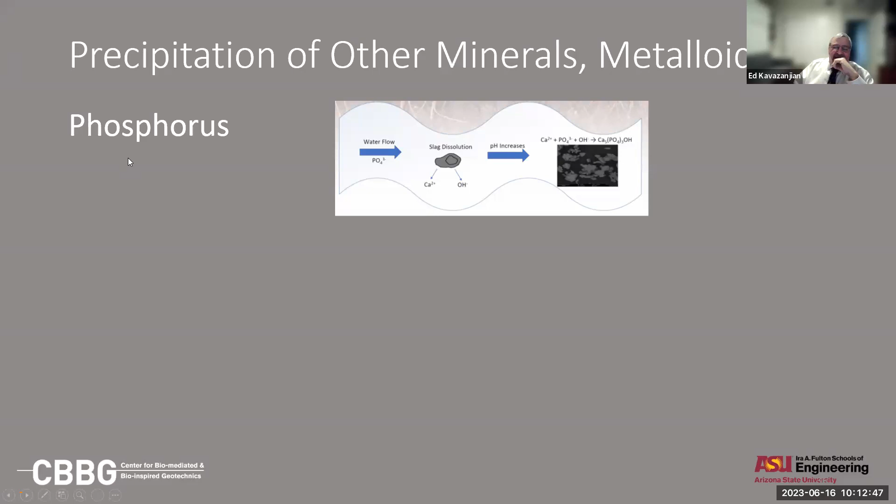Just a few words about precipitation of other minerals and metalloids. One mineral that's of interest to us is phosphorus, because runoff from farmland in the US can be impacted by phosphorus. So we worked with an industrial partner, a steel manufacturer, who had all this slag on site that they were looking for a beneficial use for. We knew from previous work that running calcium-rich, phosphorus-rich water through the slag would precipitate the phosphorus. So the idea was we went up to a farm in Wisconsin.

We put in a filter bed filled with this slag, and downstream of the filter bed we had a settling basin. The idea was we would run the agricultural runoff that we collected from one of the tile drains under this field through the filter into the settling basin. The phosphorus would settle out. Then we would discharge the water into a treatment wetlands that would remove the nitrogen. In that way, we would clean the agricultural runoff.

The problem we had is that all the phosphorus precipitated instantly, and it just clogged all the slag. It never made it to the settling basin. So after 1 year of operation, we had to replace all of the slag. We're still thinking about ways we could slow down the precipitation and make this a more viable process.

Other minerals - one of our investigators is looking at precipitating iron to create subsurface barriers. In some situations, you might be able to precipitate salt for temporary stabilization. Precipitation of contaminants is of great interest to our environmental engineers.

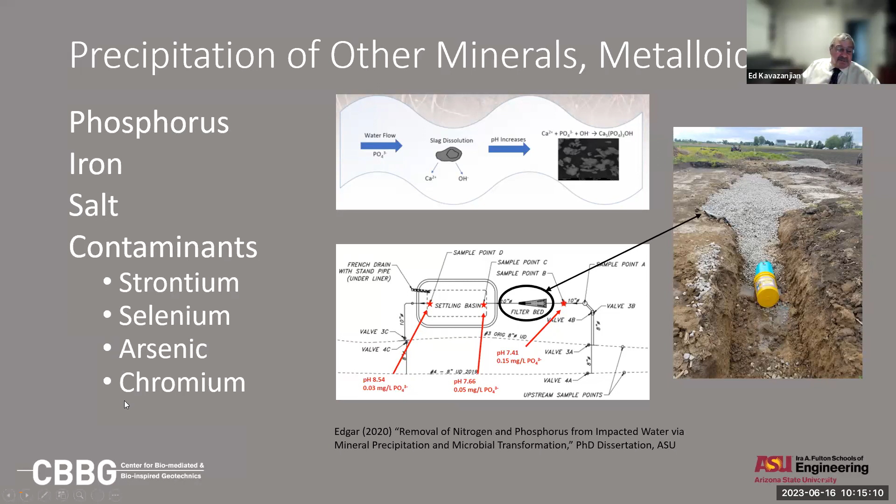One of our colleagues at New Mexico State is looking at precipitating selenium and arsenic biogeotechnically, as selenate and arsenate. Chromium is another contaminant that we think we might be able to treat, precipitate, or at least treat biologically.

What are the challenges with these mineral precipitation processes? Fines content. One of the issues with biocementing a fine-grained sand or fine-grained soil is that the number of interparticle contacts increases with the inverse square of the particle size. So if you halve the particle size, you have 4 times as many contacts to cement.

And unless you can cement most of the contacts, you're not going to get a significant increase in strength. So it makes it a real challenge for improving fine-grained soils.

Permeability, we've talked about that. It clogs up the soil. It makes it difficult to deliver the substrates. So we get this bioclogging due to mineral precipitation, growth of organic matter and gas generation, saturation of the media, the permanence and reversibility still needs to be studied, and managing the byproducts.

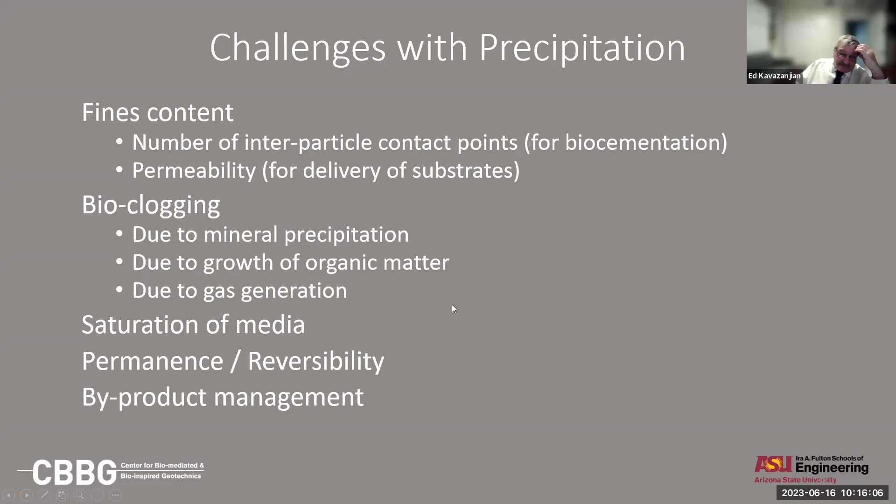I thought it's worth mentioning transformation of organic chemicals. It's perhaps the most biogeochemical process, thanks to our environmental engineers. Processes of interest include anaerobic and aerobic degradation. Some of you know I used to do a lot of landfill work where we take advantage of both anaerobic and aerobic degradation to degrade solid waste, creating more capacity in our landfills.

Reductive dechlorination, treating chlorinated solvents by reducing them to ethene microbiologically, is an important application.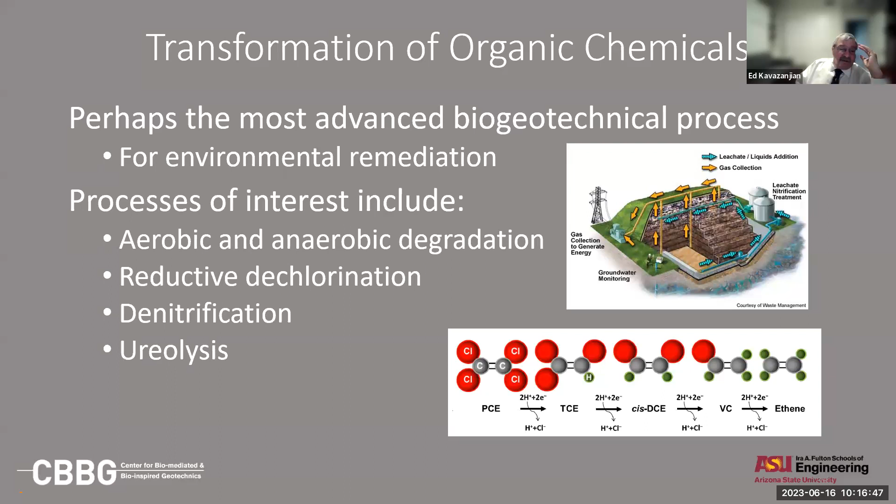Sometimes one of my pet peeves is that people automatically assume because we're using a bio-mediated process, it's going to be sustainable. Just because a process is bio-mediated doesn't mean it's sustainable or environmentally friendly. That has to be proven.

The embodied energy in EICP or MICP compared to Portland cement is about a wash. Urea takes 22 megajoules per kilogram to generate. It takes 4.5 megajoules per kilogram for Portland cement. When you look at the quantities we need for MICP or EICP versus Portland cement, it's pretty much a wash in terms of embodied energy, and pretty much a wash in terms of embodied carbon. So you can't automatically assume that MICP and EICP are going to be environmentally more sustainable.

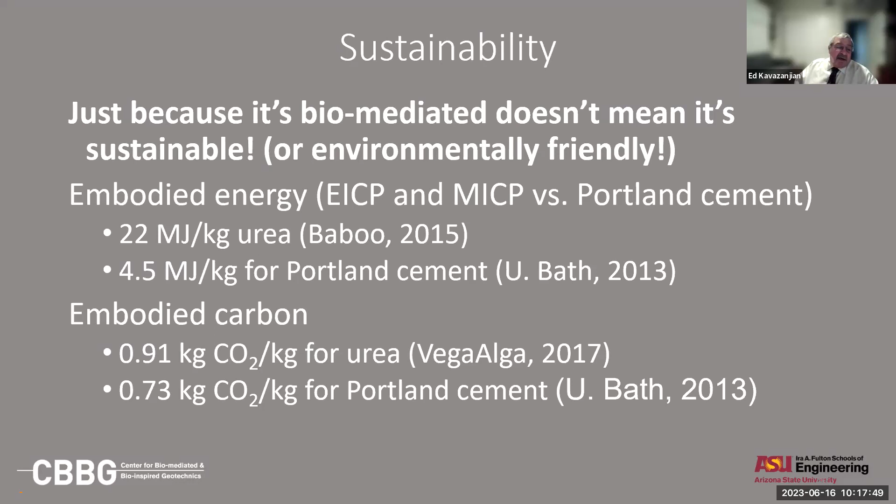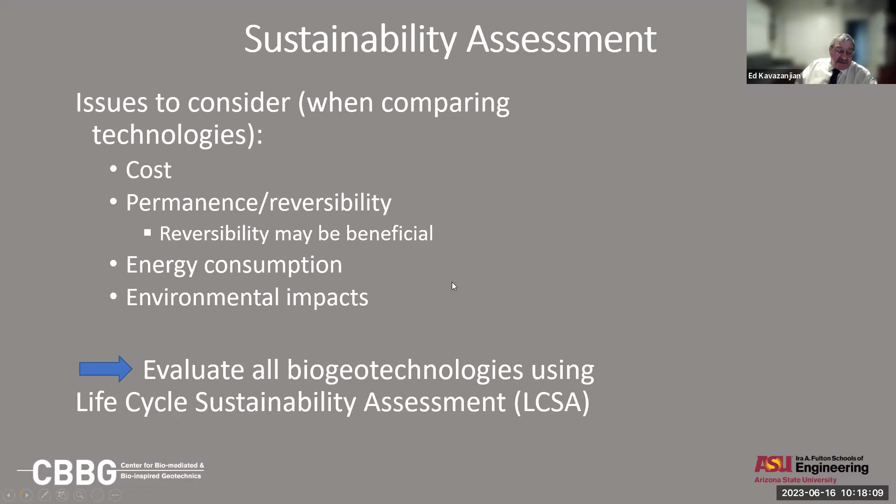The embodied energy is just one aspect of the sustainability. So when we do a sustainability assessment, we need to consider the three-legged stool: the cost and the permanence, the energy consumption and the environmental impacts. We need to evaluate all biogeotechnologies to demonstrate sustainability using a life cycle sustainability assessment, where we consider the three components of LCSA: the life cycle cost assessment, the life cycle environmental assessment, and then the social impacts of what we're doing.

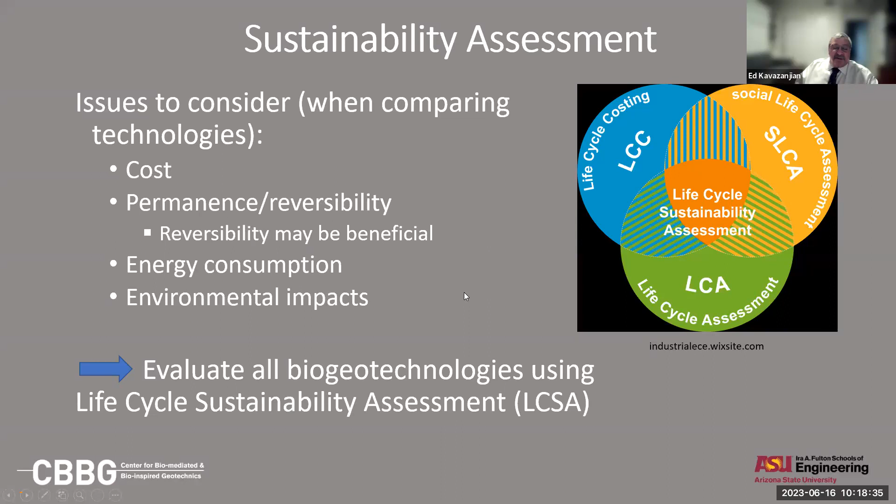That's something that we try and do at CBBG. The lead there are our colleagues at UC Davis, but all of the partners have bought into the LCSA process. We've done a preliminary LCSA assessment of EICP for fugitive dust.

Alissa Kendall and her student, Alana Raymond, along with other members of the CBBG team, looked at when does the higher initial cost of EICP offset using water. What we found is if the EICP lasts more than 2 weeks, it'll use less water, consume less fuel, and generate less emissions than running a water truck twice a day.

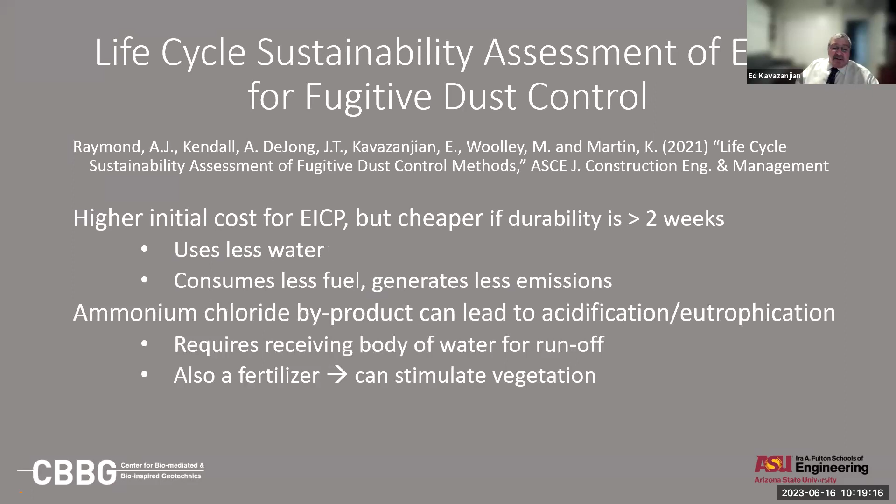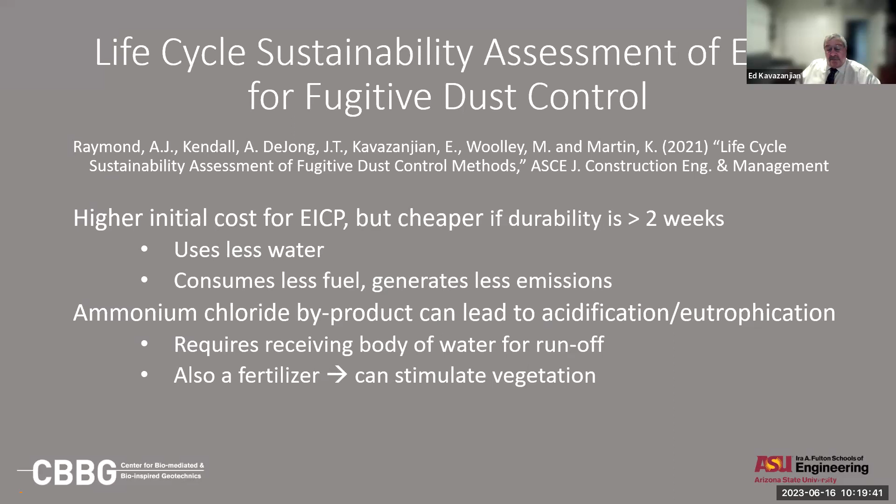We do have to, though, consider environmental impacts. We've talked about the ammonium chloride byproduct leading to acidification and eutrophication, but it's not a foregone conclusion that the ammonium chloride is going to get into the groundwater. We need to do some kind of fate and transport analysis to see where it's going to go. And for dust control, ammonium chloride is a fertilizer—it might be able to stimulate vegetation, and that'll certainly mitigate the environmental impact.

This is a snapshot of the results from our LCSA for 2 weeks of durability, comparing primary energy consumption, global warming potential, project cost, social costs based on greenhouse gas emissions, and acidification potential. That's the one place where the EICP loses. And then water consumption, where it comes out way ahead.

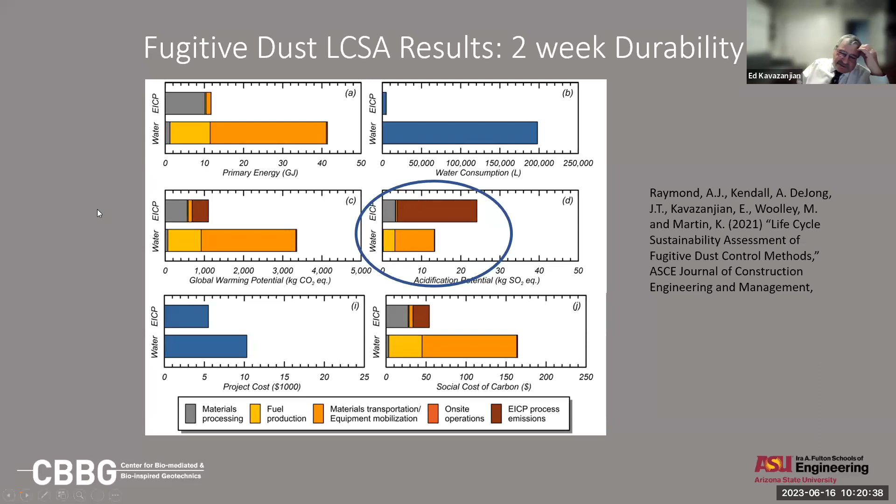Of course, it's hard to combine these metrics. It's up to the decision maker to apply his own value judgments when you have metrics that show different benefits—different processes are more beneficial and less beneficial. But in this case, to me, it's pretty clear that if we can show the EICP can last for 2 weeks, it's a superior process to using water for dust control.

Finally, I thought I should say a few words about CBBG, the Center for Bio-Mediated and Bio-Inspired Geotechnics. We've been funded by the U.S. National Science Foundation. We're in our 8th year of a 10-year funding period, with total funding from NSF of $36 million. Then our universities were each required to put up 20% of additional funding, so that added another 7.2 million.

We've added supplements to that. We've added industry funding to that. So we're well over $50 million in investment by the time we're done, 2 years from now. And we don't just do research—we do education, outreach, and workforce development.

It's four universities that span the U.S. from coast to coast, from California to Georgia, and include ASU and New Mexico State. We have education and outreach programs. We have a research experience for undergraduate programs where we bring undergraduate students in from other institutions, not from our institutions, who spend 12 to 14 weeks working in our labs in the summer.

We bring teachers in. We bring elementary school, high school, and junior college teachers into our labs for a 5-week program where they develop classes, lessons that they take back to their classes and that we publish online. So there's a library of lessons for everything from grade 4 to junior college on biogeotechnics that have been published online that are available. Probably the best place to find it is at the ASEE, American Society for Engineering Education website.

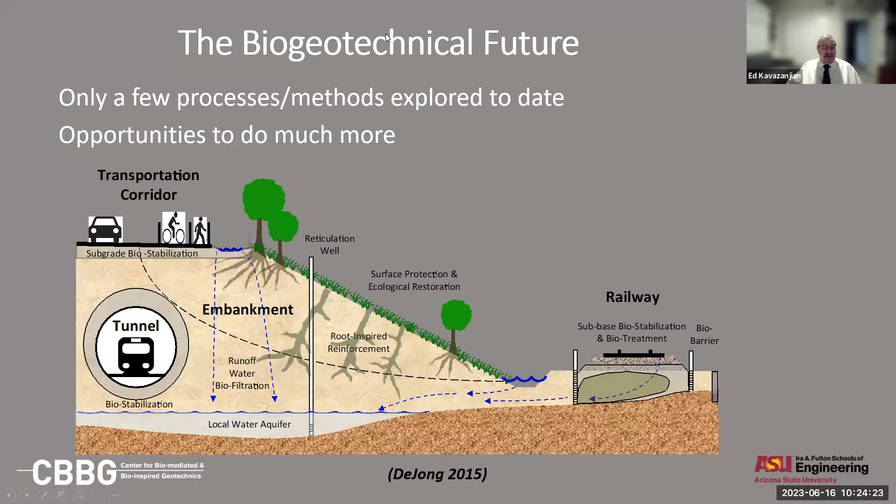So the biogeotechnical future - I think we've just scratched the surface. Only a few processes and methods have been explored to date. There are opportunities to do much more, and I think you just need to use your imagination to think of places where biogeotechnics can play a role. And with that, I'll conclude my presentation. I hope I didn't go too long, and I thank you all for listening. I don't know if we have time, but I would be happy to answer questions.

Thank you so much, Professor Kavazanjian, for a very enlightening and also most comprehensive lecture on biogeotechnics.

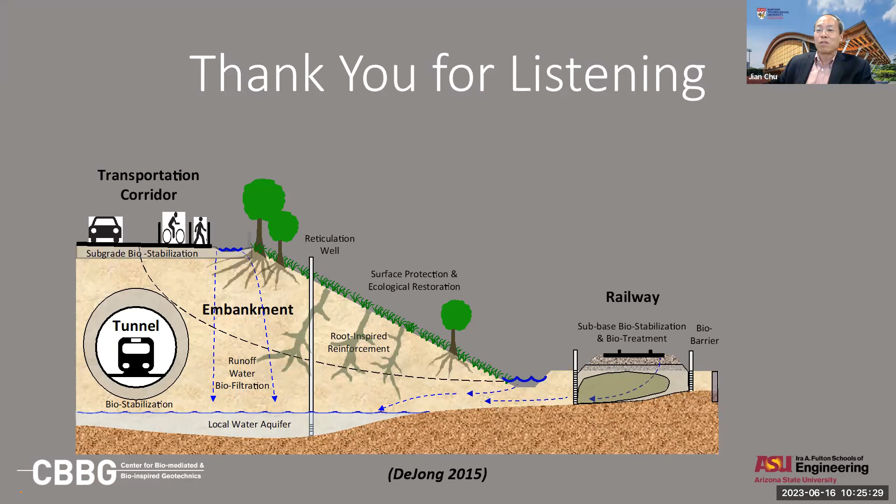Now we open the floor for questions. Maybe before I invite the audience for questions, let me just ask one question for Professor Kavazanjian. You have given a very elegant summary on the recent progress for biocement and its application. You mentioned MICP, EICP. I'm just wondering, in your opinion, which method do you think will be most promising?

Oh, you're going to get me in trouble. You're going to get me in trouble with my colleagues. I think they all have a role, they all have a place. If it didn't come across, I'm a big fan of EICP for biocementation, because it offers the promise of fewer treatments and less byproduct. And if we can figure out why we get that high strength in that one sand, and how to treat other sands through that process to get even half that strength, even 1 megapascal, the applications are boundless. I also think MIDP has great potential for mitigating liquefaction under existing facilities.